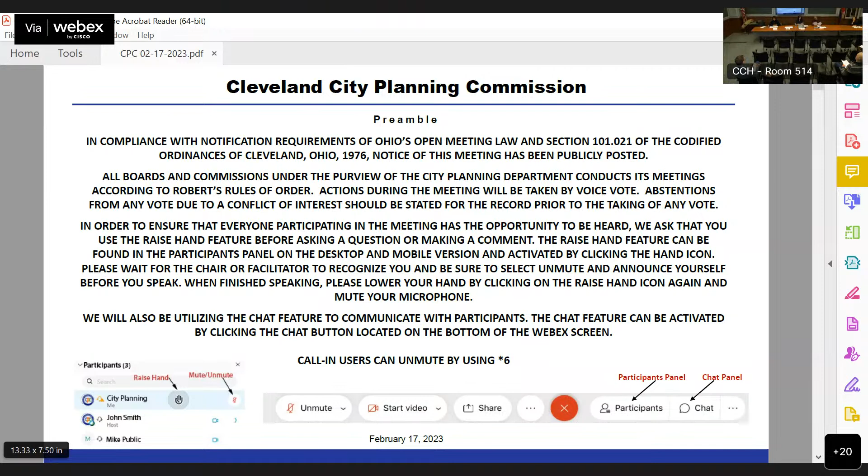The raise hand feature can be found in the participants panel on the desktop and mobile version and activated by clicking the hand icon. Please wait for the chair or facilitator to recognize you, and be sure to select unmute and announce yourself before you speak. When finished speaking, please lower your hand by clicking on the raise hand icon again and mute your microphone. We will also be utilizing the chat feature to communicate with participants. The chat feature can be activated by clicking the chat button located on the bottom of the WebEx screen. Call-in users can unmute by using star 6.

All meeting activity is being recorded via the WebEx platform. These proceedings are also being live streamed via YouTube. All requests to speak on a particular matter via our website and email have been considered. We've also received emails from those who have provided written comment on a particular matter.

Thank you. Michael, can you call the roll? Anthony, present. Downing, present. Fluker, present. Curry, present. McCray Scott, present. Shiori Clark, present. Madam Chair, we have a quorum. We have a quorum, thank you.

First order of business is to approve the minutes from the last meeting. We have a hard copy here that we've reviewed as well. I move to accept as presented. A second. We have a motion and a second. Any other items from the members online? If not, we can call the vote. Anthony, yes. Downing, yes. Fluker, yes. Curry, yes. McCray Scott, yes. Shiori Clark, yes.

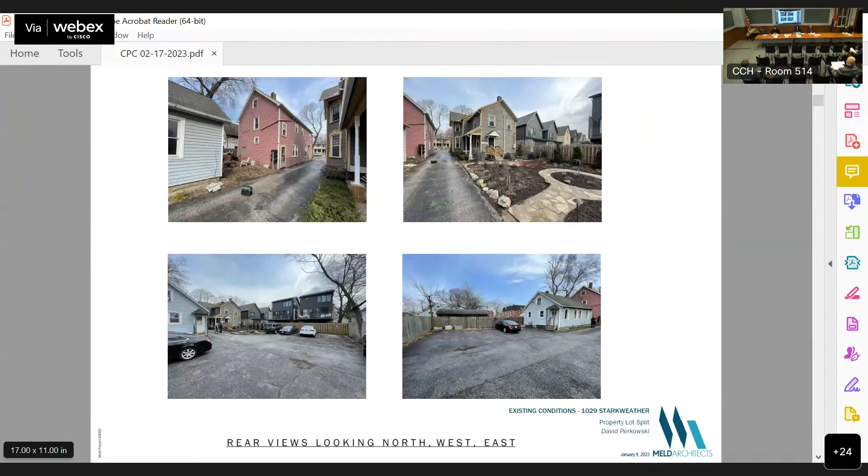Is there a plan here? Is there a plan for renovation or selling, or what's the intent of the split?

The property is owned by Merchant Area Living Partnership, and my name is Dave Perkowski, I'm the owner. The goal is to renovate the front house, and with that back cottage, there's a small existing structure. We want to make sure we could get the lot split, but then the ultimate goal is to design new construction, take down that structure and build new there. The ultimate goal is to sell both the front house and the back house, but to renovate both.

Commission members, any questions? I move for approval. Second. Motion and a second. For the commission members online, it will be helpful if you raise your hand on any item, either to comment or ask questions, so I can see there are questions online. But I don't see any, so let's call the roll.

Anthony, yes. Downing, yes. Fluker, yes. Curry, yes. McCray Scott, yes. Shiori Clark, yes.

Madam Chair, I have a question, I'll introduce myself. I'm Shane, I'm from the survey department, I facilitate a lot of these splits that go to planning and other issues with building. This will need to be looked over by planning and building, mainly for their issues like they'll want to see a utility easement, where you're hooking up your water and sewer. But the only question I have planning-wise right now is that access easement—is that an easement of record? Yes, it is a recorded easement, not the proposed easement, but the access easement is a recorded easement.

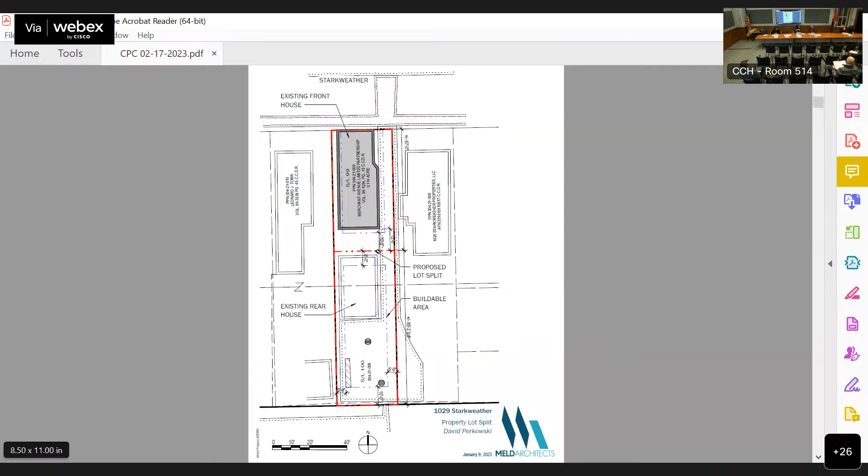Maybe we can take it off the line. For the most part of the commission, our hope was that you've removed that, that we're not reviewing them here. They were being reviewed between you and planning offline, not here at the commission, but thank you for your questions.

For the record, which is why the second one is postponed, when there is a lot that requires access, we require that it's recorded. That is a requirement we have. That also includes things like who's in charge of snow removal, those sorts of things, and that's been a practice we have had for many years. Sometimes we will approve something conditionally and the director will not sign off on it until it's actually recorded, so we make sure that happens because we know there'll be unhappy neighbors down the line eventually if we don't. So thank you. We had a motion, second, full vote.

This one has passed. On the next item, which is 004-13-0117, at 2504 West 10th.

I need a motion to table by someone. Madam Chair, I move to table the address 2504 West 10th Street lot split and consolidation. And I second. Motion and a second.

Let's call the roll. Anthony, yes. Downing, yes. Fluker, yes. Curry, yes. McCray Scott, yes. Shiori Clark, yes. Motion carries, thank you.

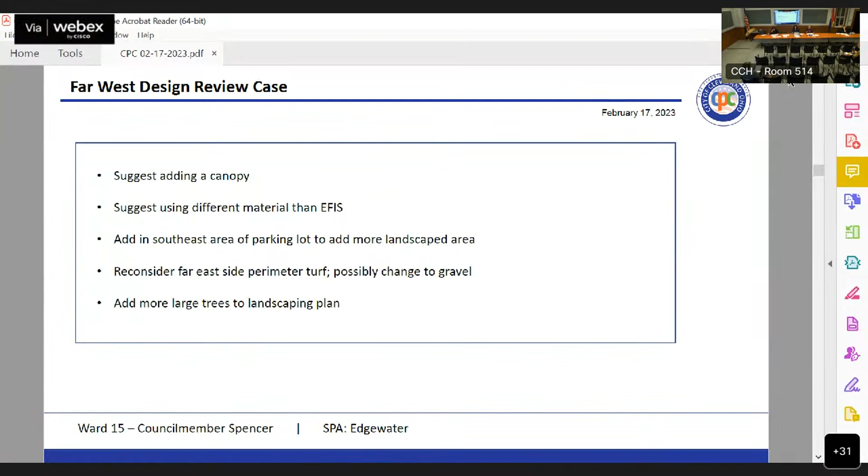Anthony, yes. Downing, yes. Fluker, yes. Curry, yes. McCray Scott, yes. Shiori Clark, yes. Motion carries.

All right, Dave, I need to swear you in first. Do you swear to tell the truth, the whole truth, and nothing but the truth, as you shall answer to the penalty of perjury? I do. Okay, all right, take it away.

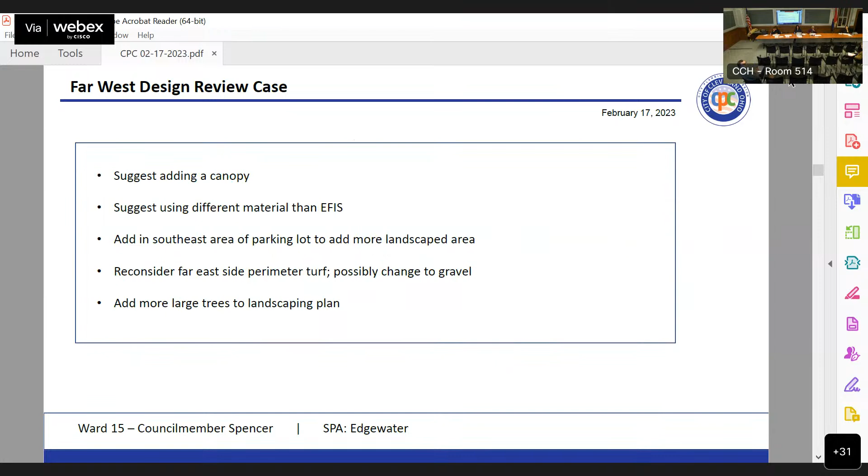Okay, so do I have control of the screen or would you like me to walk through here? Basically, we laid out per the request, identifying a district map here. We're looking at a site that's right on the edge of Cleveland and Lakewood, at the corner of 117th and Detroit.

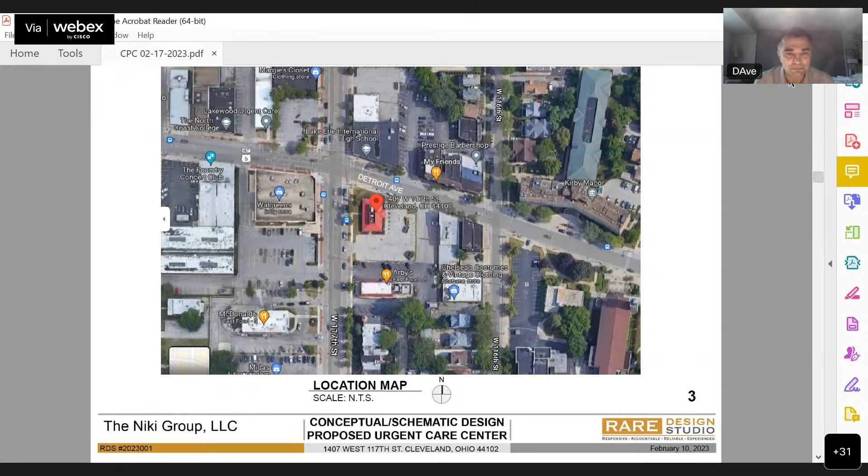This area here is currently zoned with the pedestrian overlay district at this particular corner. The site here currently has a Pizza Hut located on that corner, and that's what we'll be looking to demo. I totally understand it makes sense to have the demo wait until after we go through design review, but we're looking to remove the existing Pizza Hut and replace it with an urgent care center.

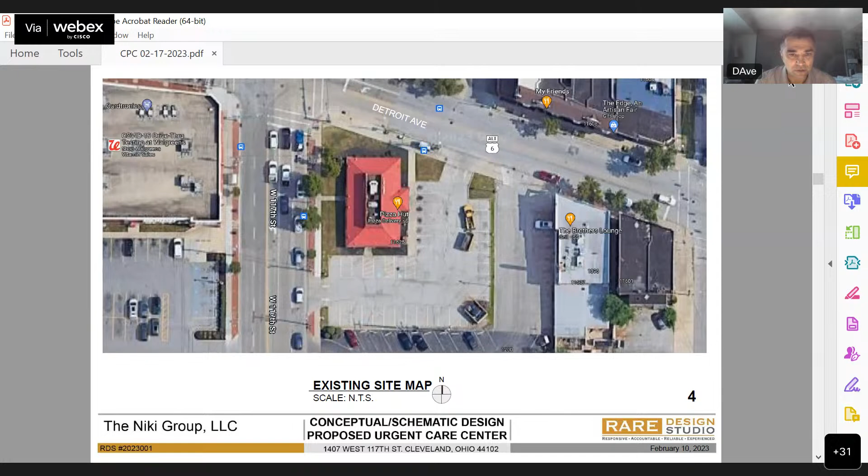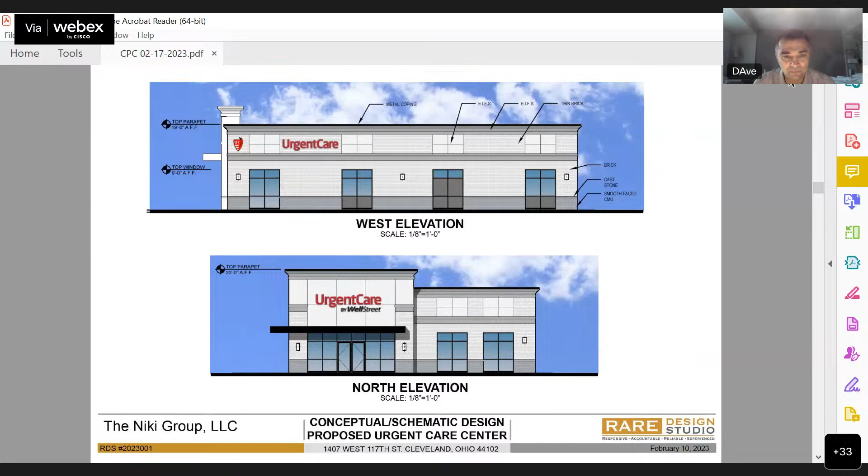I believe I do have Peggy Brown, our landscape architect, on the call as well. Maybe if she could unmute, she could walk you through the landscape design and discuss the items that were requested from design review that we incorporated.

Thank you. Do I need to be sworn in? Yes. Do you swear to tell the truth, the whole truth, and nothing but the truth as you shall answer to the penalty of perjury? Yes. Go ahead. All right.

Thank you. As Dave was saying, that Pizza Hut is coming down, and currently surrounding it is all turf with some shrubs and a bad looking tree in there. So we're getting rid of all the shrubs and all the turf, replacing the turf with a bed of ground covers, ornamental grasses, and some shrubs that will give some fall color, along with other shrubs that will give an evergreen aspect to the base of the building.

So we're eliminating all the turf altogether. It'll be drought tolerant, very low maintenance landscaping that we're proposing here.

Along Detroit Avenue, we're coming back in with a series of zelkovas that are going to be moved far enough away where they're not going to be impacted by the power lines there, but provide kind of canopy along the streetscape for enhanced pedestrian movement there, along with some additional trees.

On the south side of the building will be a columnar tree where we'll be pulling out some of that asphalt that currently exists in order to extend the building facade down farther to the south. It's going to create some of that massing that the building would provide, but instead of having an open gap with a lot of asphalt there, we're closing that gap down with two boxes of trees with some shrubs in there to provide a barrier from the parking lot.

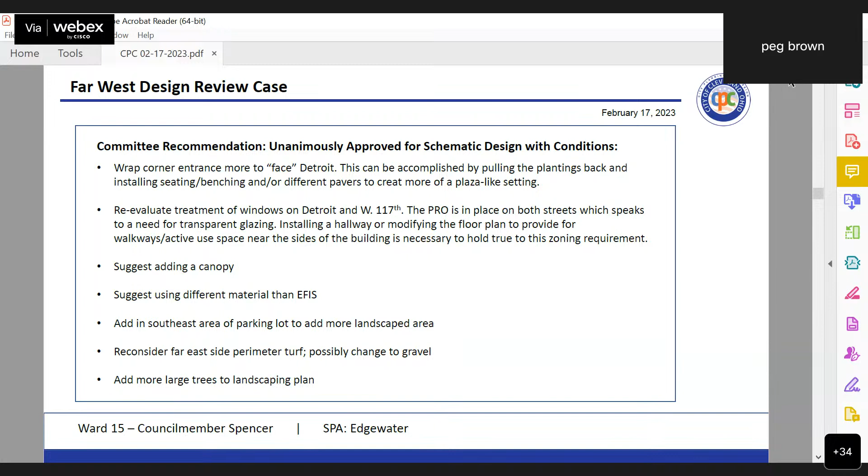And what about the first two - the wrap corner? On that one, if I may, we talked about it being kind of a security issue, not to put it out at the corner of our property calling in the public right there. So we provided that plaza, more open than what it originally was with just a 6-foot walk up to the buildings. We've expanded those areas at both doors to be more plaza-like and kept all the activity closer to the doors where it's more easily watched, and to keep eyes on it instead of it being out on the corner where it's going to be less visible from the building. And I think there's another mini park - it was suggested there's one across the street, kitty corner to this one in Lakewood.

And for item number 2, the original design review we showed had all the windows on 117th as opaque, all kind of spandrel glass. So that's where the discussion went - could we put a wall back further to create an alcove to put displays, since we were not having any transparent glass over there. So we went back to the tenant, reworked the design in order to shift as many spaces as we could to have more transparent glass over there. That's why, instead of going the hallway route, we found ways to get transparent glass where we originally did not have any on 117th.

To the chair, if I may, there are staff comments by Shannon Leonard and also by the planner Adam Davenport, so if we could have them address some of those - it's the PRO.

I can take a first crack at it. So the main discussion around this project is mostly because of the PROs on Detroit and West 117. The use with the urgent care and wanting the privacy of those rooms is kind of in conflict with the PRO glazing requirements. If maybe Xavier wants to flip back to the photos across the street - the CVS or other buildings on the corner also have those fake windows with advertisements in them. So our discussion and goal at the committee level is to create a little more active use inside right there at the corner.

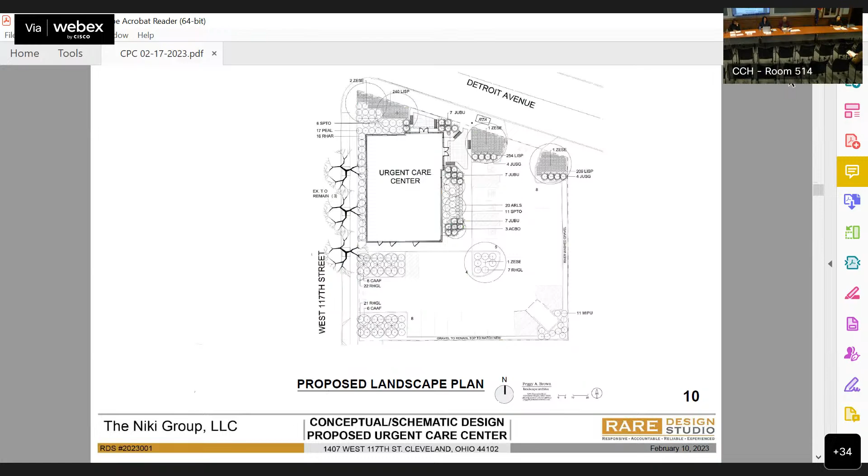I make a motion for schematic approval on FW 2023-002, West 117th Street urgent care construction, with the conditions as outlined by the Far West Design Review. Second. We have a motion and a second. Can you call the roll? Anthony, yes. Downing, yes. Fluker, yes. Curry, yes. McCray Scott, yes. Shiori Clark, yes. Motion carries.

We need a motion to remove from the table the demolition, and then a motion for demolition. This was 2023-003, the demolition of 1407 West 117th Street.

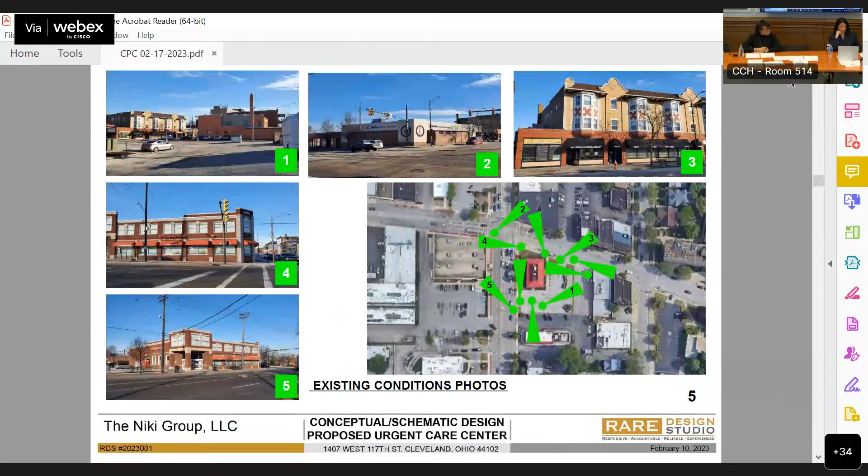I'll make a motion to remove from the table, 2023-003, proposed demolition of a one-story commercial building. Second. Sorry, is that the right one? No, it's 2023-003. Okay, that's fine. And we have a motion, do we have a second? Second. Motion and a second.

Call the roll. Anthony, yes. Downing, yes. Fluker, yes. Curry, yes. McCray Scott, yes. Shiori Clark, yes. It was removed from the table, so now we need to approve the demolition of the building lovingly known as the Pizza Hut.

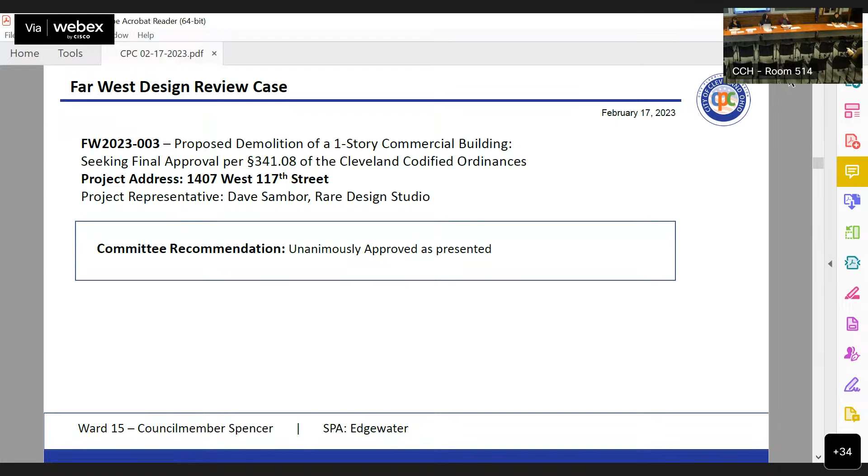We need a motion for demolition. I move to approve the demolition of 2023-03, a one-story commercial building. I second. Motion and a second, call the roll. Anthony, yes. Downing, yes. Fluker, yes. Curry, yes. Scott, yes. Shiori Clark, yes. Motion carries. All right, thank you, Dave.

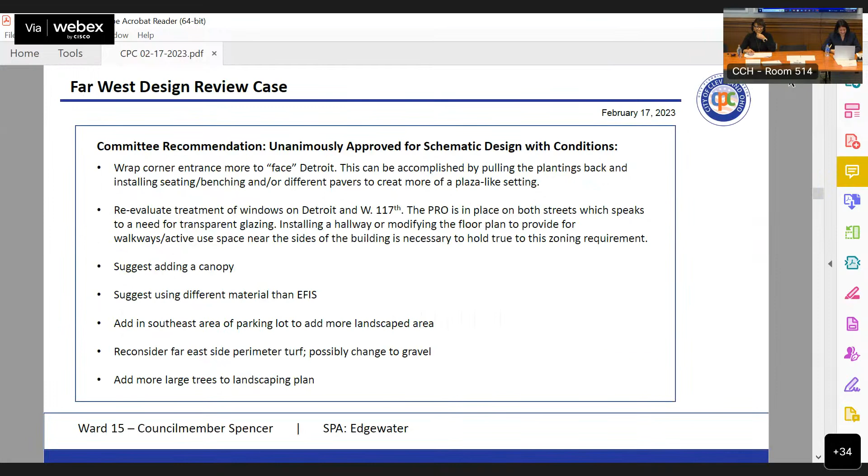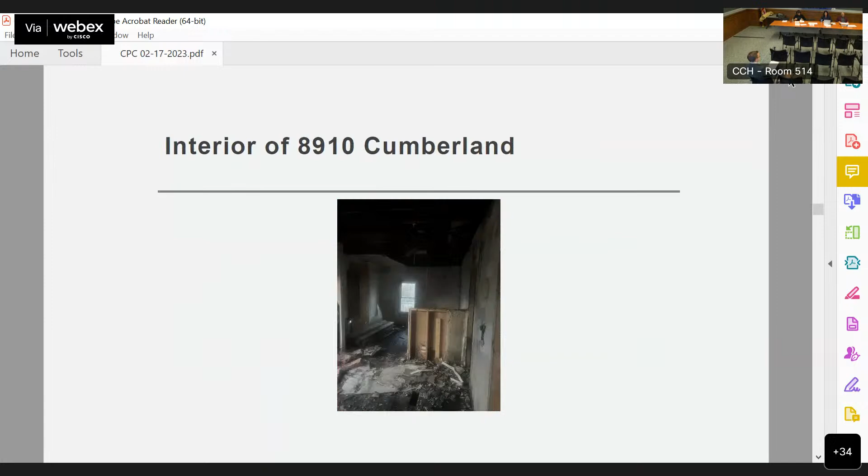Now we're going on to Northeast Design Review. This is 2023-032, the Hitchcock Center. It's new construction, this is also schematic design approval at 1227 Ansel Road.

Brian, are you- oh wait, it says the applicant withdrew the project. The planning commission tabled it, subsequently tabled. Are they here? Should we remove it from the table?

Good morning, this is Brian Garrity. Okay so Brian, first we're gonna remove it from the table, then I'm gonna swear you in, okay? So I need a motion for this one to remove it from the table.

I make a motion that NE 2023-032, the Hitchcock Center new construction, be removed from the table. Second. Motion and a second, call the roll. Anthony, yes. Downing, yes. Fluker, yes. Curry, yes. McCray Scott, yes. Shields, Erie, Clark, yes. Motion carries.

All right, now we're gonna hear the case, the same case once again. This is schematic approval for 1227 Ansel Road. Brian, I need to swear you in. Is there anyone else that's gonna speak to this besides you? I also have on the call with me Mark Dodds with the Finch Group, he'll probably speak as well. Okay, that's fine. Do you both swear to tell the truth, the whole truth, and nothing but the truth as you shall answer to the penalty of perjury? I do. Okay, take it away, this is schematic.

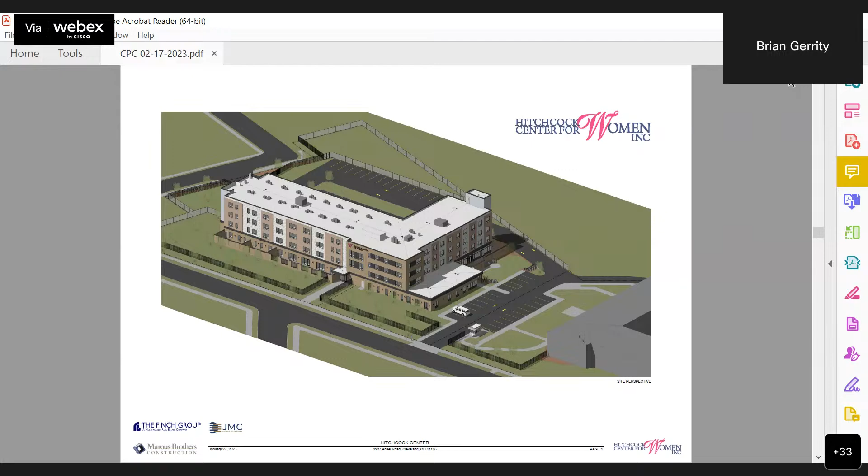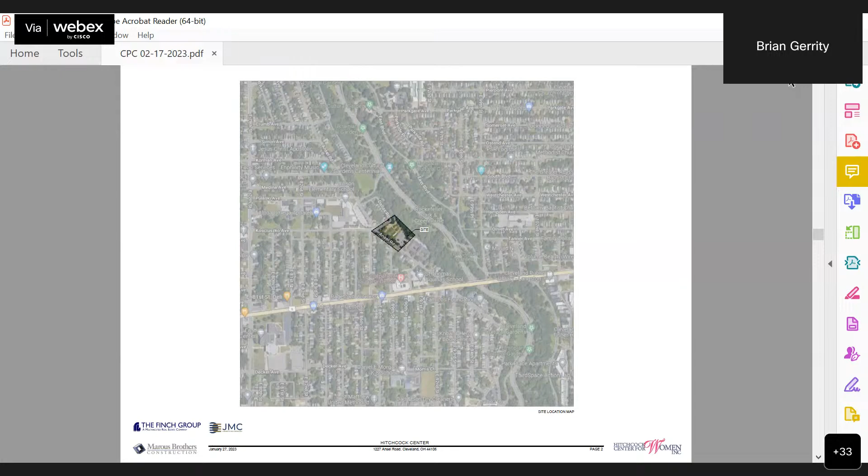This slide is just showing where we sit, right over the Cultural Gardens on Ansel Road by Superior Avenue. Just to let you know.

Site demolition: the existing site is mostly a combination of greenfield and some old asphalt paving. There are a couple of existing structures, a small greenhouse and an old handball court, both unoccupied. Both buildings are going to come down and the site's going to be completely clear.

So the site plan - early discussions with planning a little while back, we previously had the building pushed towards the back of the site. It was requested that we bring the front elevation of the building in alignment with the existing seminary building.

There are two primary components to this project. We call it residential treatment, which will serve the same function as what the Hitchcock Center is doing now - treatment for women with substance abuse issues, and they also allow their kids to live with them. That's one part of the building, the right wing that goes up and down. The wing on the left that runs left to right is a supportive housing component with 53 total units. We're providing 43 parking spaces for the supportive housing, and 22 parking spaces for the residential treatment on the right.

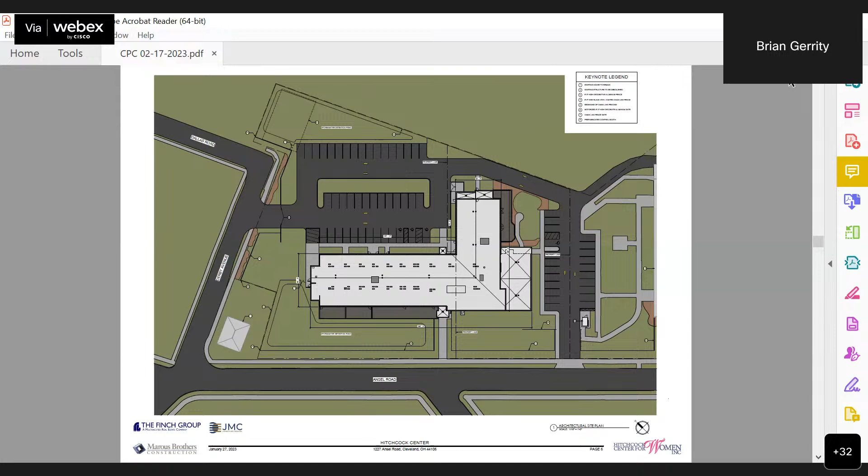Here's our landscape plan that we presented for schematic approval. You can see the rain gardens in the front and back of the property. Some trees will be lost along Ansel Road because the stormwater detention gets into the drip line and they're not salvageable. We'll save what we can, prune and clean them up, and add a substantial amount more trees within the property and along Ansel Road and Dallas Road.

We are introducing exterior courtyards. There will be a secure courtyard for the residential treatment side with playground structures, hopefully in the future, for the kids staying there with their mothers. There will also be courtyards for the supportive housing, both for the units on the first floor and courtyards serving common areas like the community center and fitness room.

So, you can keep going to the next slides.

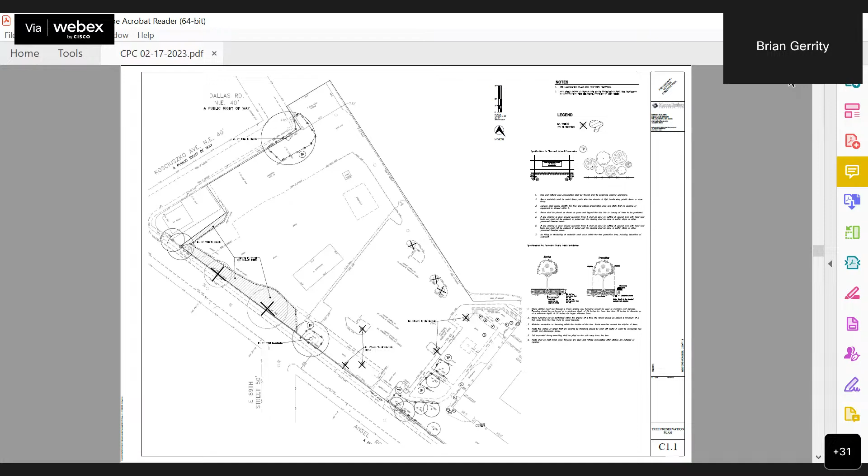This slide was just our tree preservation plan, which we were required to submit. The following slides, I don't know if they're of general interest, but it's our SWPPP plan for the project.

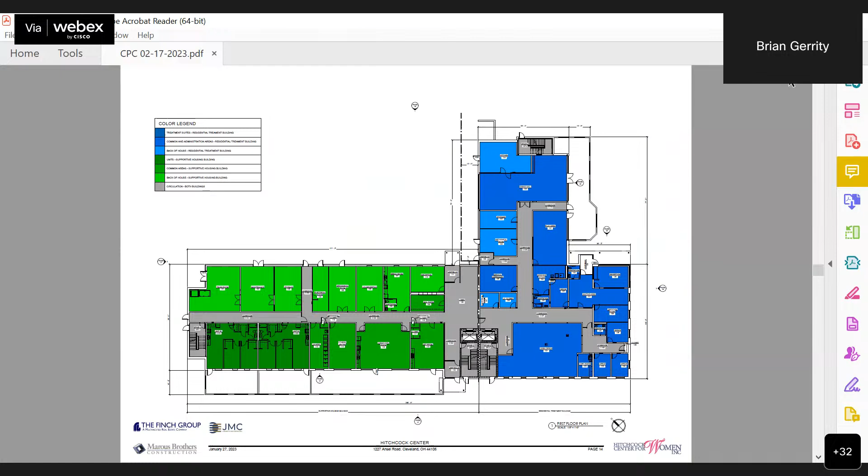The blue floor plan on the right is the residential treatment. The first floor has communal areas like a playroom for children, a communal dining hall, and administration areas. On the left-hand side, the supportive housing has common areas, a fitness room, communal laundry, community room, arts and crafts room, and a couple of two-bedroom units in back of house.

And the upper floors — this is Mark Dodds, the Finch Group. I'm going to let Brian take a break for a minute.

The reason this project is configured as two separate buildings joined together is that the residential treatment, the blue part of these plans, is being funded primarily through grants from Cuyahoga County, the City of Cleveland, and the Cleveland Clinic Foundation, with operations funded through Medicaid and Medicare. The green portion is being funded through bond gap financing from the Ohio Housing Finance Agency and 4% low-income housing tax credits, as well as other funding from the city and county. Its operations are funded by project-based Section 8.

We have 53 units assigned to this building. What that means is the green portion is being treated as supportive housing. That's a new program for Hitchcock.

Because it's funded with project-based Section 8, we cannot discriminate. So there is a probability that men will be staying in the supportive housing, whereas the treatment side is strictly for women and their children up to the age of 12.

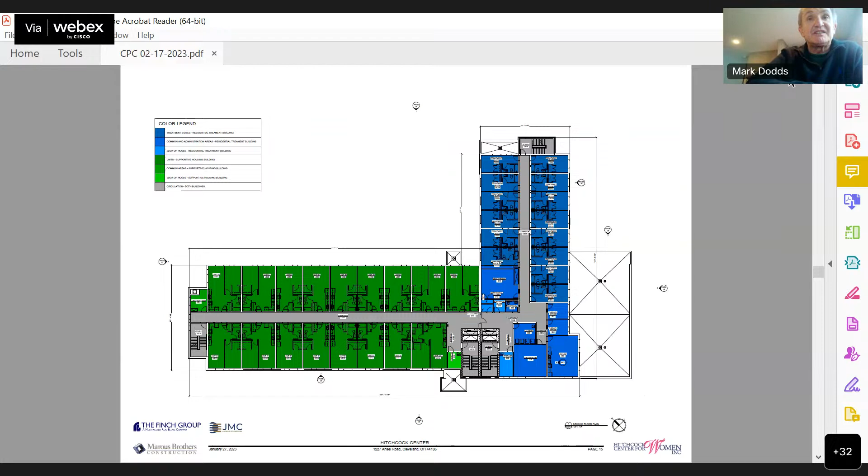So basically, the reason for two buildings is that they're funded separately, both in terms of capital for construction and operationally. But they will look like a single building, as you will see.

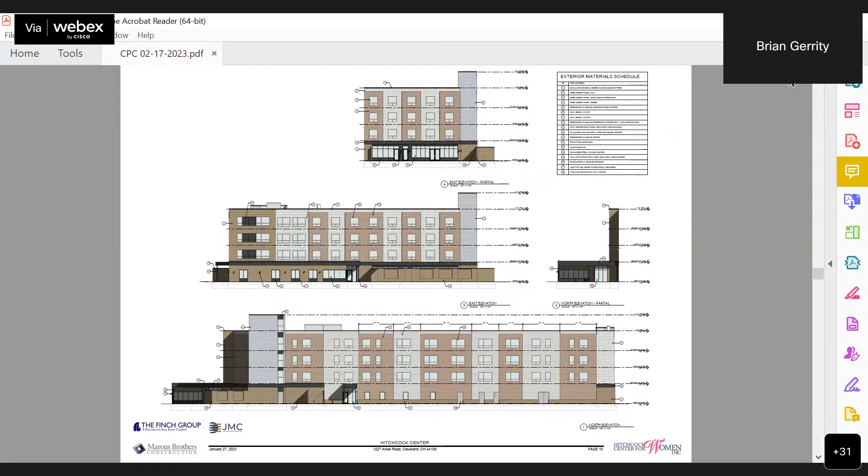Okay, thanks for that, Mark. I think that's helpful. Probably to talk about the exterior elevations, it's helpful to go to the last slide that has our 3D perspectives.

The perspective at the bottom is the public-facing elevation you'll see on Ansel Road. The elevation at the top is the rear of the building, backing up towards the cultural gardens.

When we first came to Northeast Design Review, one of the comments we got was that the overall aesthetic looked a little too institutional. I think a lot of what was driving that was the way the elevations were designed and arranged — we had a lot of very strong horizontal banding. So we took that into account and got rid of the horizontal banding outside of the main brick, prominent corner feature, and broke up the elevations vertically so it started to read more as housing, like units stacking on top of each other.

Materials we're proposing include primarily face brick on the first floor, with some aluminum storefront punched openings, and brick as well. On that corner piece, the color tone will be similar to the adjacent historic seminary building that Hitchcock currently occupies — sort of an acknowledgement to that.

The other primary materials are fiber cement Nichiha-type panels. The white is sort of a flat monolithic panel, and the brown panels are a wood grain finish, reflecting some of the wood siding of the single family homes scattered around the neighborhood.

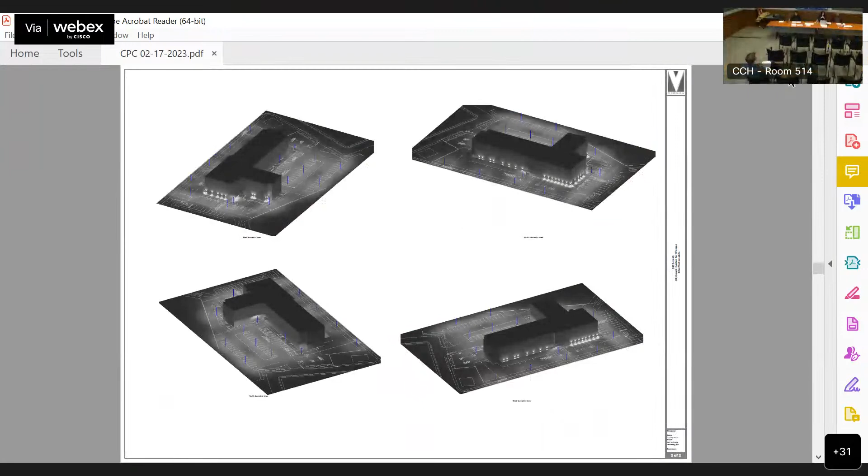Okay, I have a question back to Mark about what you described — if you can go back to the site plan. You said there are two funding sources, for the first floor plan, the one that's blue and green. One is the blue and the green, and the other is Section 8.

Is that correct? And the other one is market rate? Is it?

No, the residential treatment capital dollars are coming from grants from the city, the county, and the Cleveland Clinic Foundation. So that will be built debt-free for the Hitchcock Center, and then their operations are covered the way they are now.

They get reimbursed from Medicaid and they get some funding from the ADAMHS Board. Got it. And there's one of the - I guess what I'm asking is, is there one front door to this building?

The front door for the residential treatment is in that sort of knuckle on the right-hand side. You can see where the courtyard is on the exterior. So there's an entrance for the residential treatment. That part of the project has to be kept very secure. Many of the women coming here are coming out of very difficult situations.

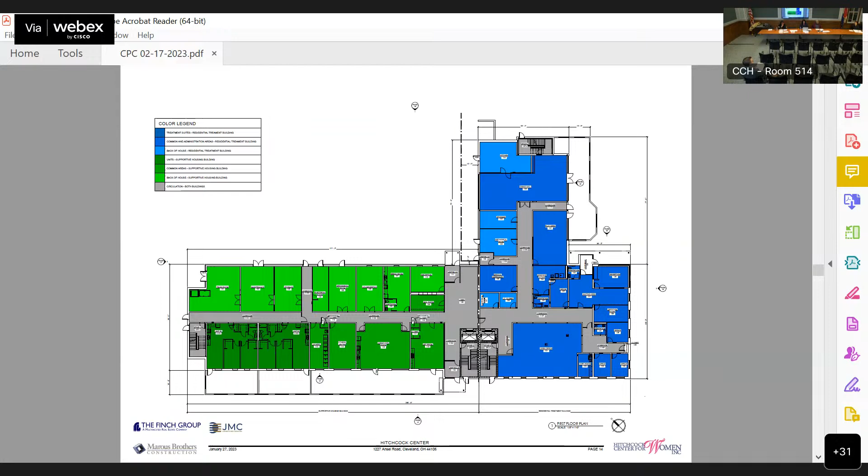Overall, we would say the design review committee's suggestions and recommendations should be considered, as well as your recommendation to have a circulation plan for the final review.

I think Marika's trying to say something, unless we're done. I think Shannon has her hand raised. Is that old, Shannon, with your hand raised? Marika does. Marika, go ahead.

Sorry, yeah, I just wanted to add, I agree with what August is saying around circulation and trying to understand how people will be able to flow in and out of this space. I think the other thing, just more of a suggestion, is that this feels like a large site with a lot of grass plantings, but as far as I can tell, almost no outdoor space that the women using this facility would be able to use. I'm curious if you had any plans for outdoor, probably shaded or private outdoor spaces. It just feels like there's so much room, yet somehow the building still feels exposed.

Well, maybe the first floor or the landscape plan might be best to pull up. Because we do have a dedicated outdoor courtyard adjacent to the playroom and the cafeteria, dining hall. And then immediately outside of that, we do have a dedicated area that is eventually going to be used for playground equipment for any of the children staying there with mom.

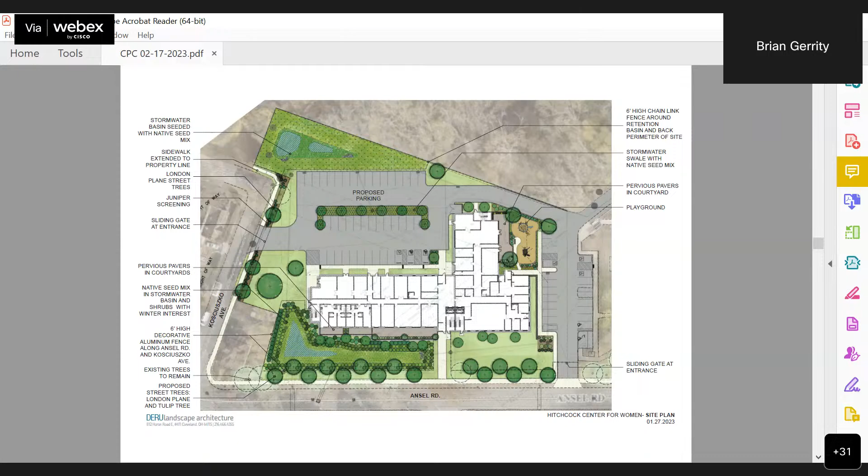I think that's great. I'm looking at the site plan and it feels like there's a lot of green space that is just going to feel like ornamental grass that isn't actually space anybody would want to hang out in. So that's a broad piece of feedback I have: is there a way to take some of that large amount of landscaped space along Ansel Road and/or that stormwater basin back there and actually make it into more of a seating area that could be designed as peaceful outdoor space people could hang out in during the summer, while still feeling private from the street. That may go against some of the other conditions around connections to the other facility, but if I was a woman living there, I would want to have a space where I could hang out outside when it's nice outside.

We could add that as a consideration, but I think you can think about it. I think you're saying, Marika, this is a suggestion to think about.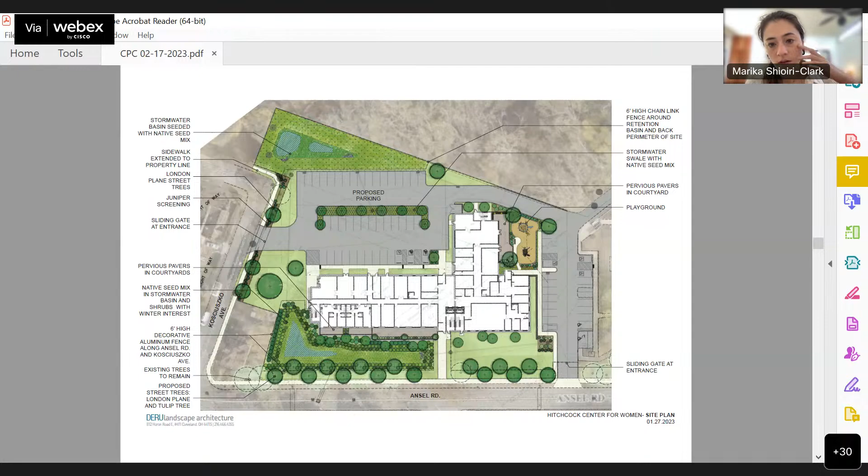Yeah, so I don't see any other comments. I think we'll need a motion. I think we should add August's comment to whoever makes the motion for incorporating the design review comments. Sure, I'll try. I move to approve schematic design of item NE 2023-32 with the 4 comments from design review, and the stipulation that the applicant come back with how this site's being used with circulation and considerations to other outdoor activity that might be more amenable to folks who are transitioning out of the treatment center.

Okay, we have a motion. Do we have a second? A second. Call the roll. Anthony, yes. Downing, yes. Booker, yes. Curry, yes. Craig Scott, yes. Shioiri-Clark, yes. Motion carries. Thank you very much.

We'll see you soon at final approval.

The last design review item is Euclid Corridor 2023-005. This is the Cleveland Clinic Innovation District Research Buildings. This is for schematic approval. I see Dallas Felder and Jayme Schwartzberg.

Anyone else? I will need to swear you in. Is there anyone else, Dallas, on your team besides the two of you? I believe there are representatives from the Cleveland Clinic. Yeah, Travis Tyson from Cleveland Clinic. Okay, please, Travis. So all of you, do you swear to tell the truth, the whole truth, and nothing but the truth, as you shall answer to the penalty of perjury?

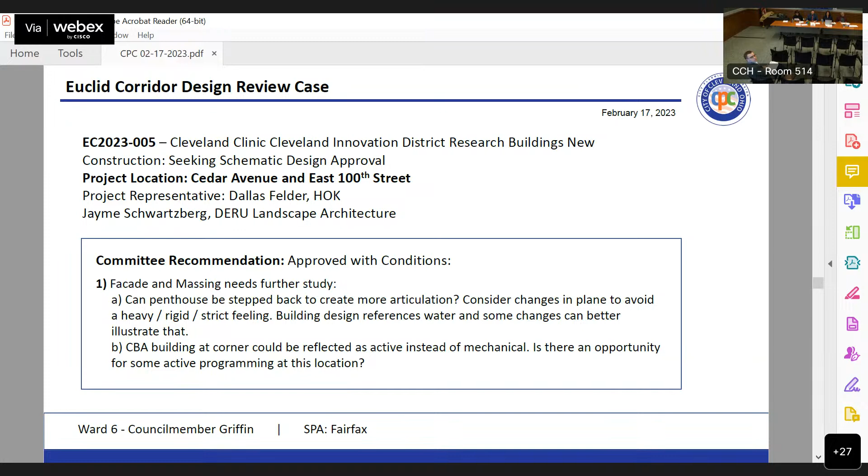Good morning, everybody. I'm Travis Tyson, Director of Planning for the Cleveland Clinic Enterprise. Thank you for the opportunity to come again and present our Cleveland Innovation District project. This project is a new global center for pathogen and human health research, and it'll be a cornerstone for the Cleveland Innovation District along Cedar Avenue.

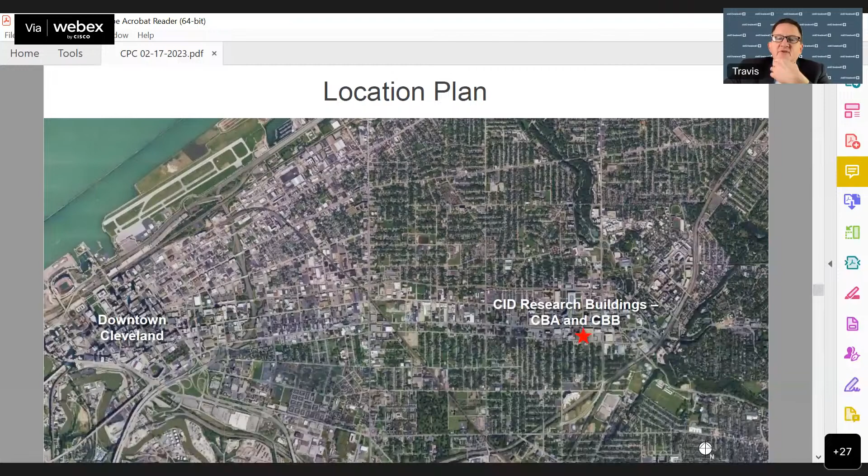As you know, it's part of the Jobs Ohio initiative. This project itself will bring about an estimated 1,000 jobs to the city by 2029. We've been working closely with FRDC and the Fairfax community, as well as their master planning architect, UDA, as we develop this project and they develop their master plan. We're excited to see this project come together and what it's going to do for not only the clinic, but the community and the city of Cleveland, and most importantly, the healthcare research and outcome around the world.

We are here today seeking schematic design approval by the committee. As you know, we received unanimous approval from the Euclid Corridor Design Review Committee yesterday. As we continue to develop this final design of the project, we will take into consideration the Design Review Committee's recommendations and continue to work with the community partners and get their feedback as the design progresses. So we are excited to bring the project to the city here today for approval as part of the Cleveland Innovation District, and we appreciate your time today.

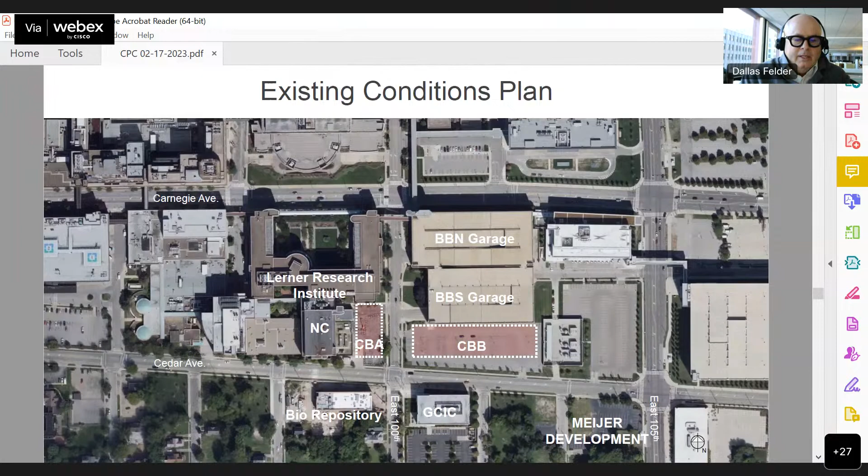People using this building will be coming from the east parking garage at 105th. We looked at this as a real opportunity to create a welcoming entry into the campus, intentionally setting back the buildings, aligning with the existing campus buildings, but also to create green space or park space, or pocket park space, at the front of the buildings to engage the neighborhood in a more gentle manner. And Jayme will talk about that next.

So what you're looking at is the overall landscape plan for buildings A and B. We've tried to look at both the pedestrian movement outside of the buildings, how people are walking by, where they're going to want to cut corners, how employees from the clinic are going to go when they're walking to the Meijer to get lunch, where people from the neighborhood are going as they're cutting through into the clinic, and also really trying to bring some pedestrian traffic up to the building itself.

HOK has designed a really thoughtful building that, despite the level of security required for research, is really attempting to bring some of this activity, make it very visible to the neighborhood, and really engage people with the incredible work that's going to be going on here.

The clinic has also been very thoughtful about the employees in the building, that they're going to be looking for places to come outside, to have a coffee, to get lunch, to take a little break, take a phone call. So we've placed seating close to the lobby so that it forms an extension of the lobby. You can come outside and sit, but also take a quick break or a little bit longer break, and enjoy the landscape. Then you'll see some benches closer down to the corner, adjacent to the existing bus stop.

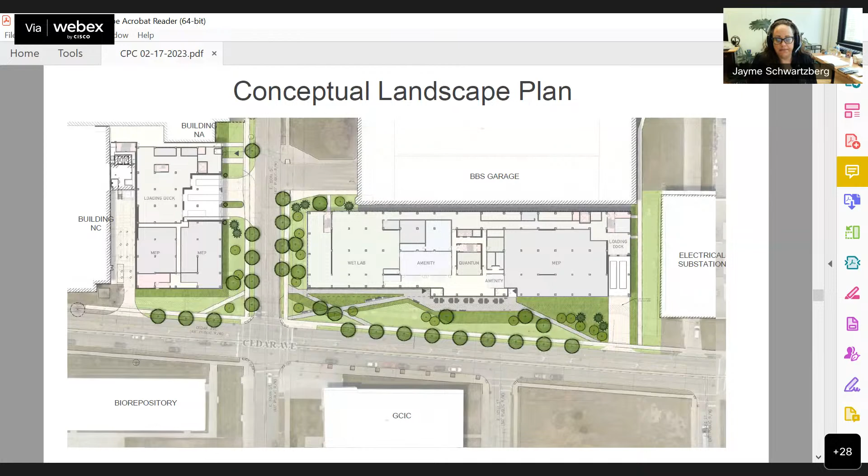You can go to the next slide. So this is a closer view of Building A. Building A is much more of the kind of mechanical equipment, loading dock sort of uses for the research.

You can see we have a large loading dock that faces onto 100th, and we've really been trying to work with the clinic. They've been great about what that pedestrian experience is like and how we keep it as softened as possible, so we're still working through that. And then you can see the landscape, the street trees starting to create that gateway between the two buildings.

You can go to the next slide for Building B. Here you have a closer view of where people are being brought up to the main lobby. You can see the quantum computing. There's wet labs on the west corner, and that's going to have co-working on the inside, so we really want people to see the inside-outside access going on there.

You can also see where the two black arrows are on the south side of the building—those are the main entrances. So coming and going at the beginning and end of the day, we've really tried to activate the front of this building and make it clear that it's the front by bringing employees through this way.

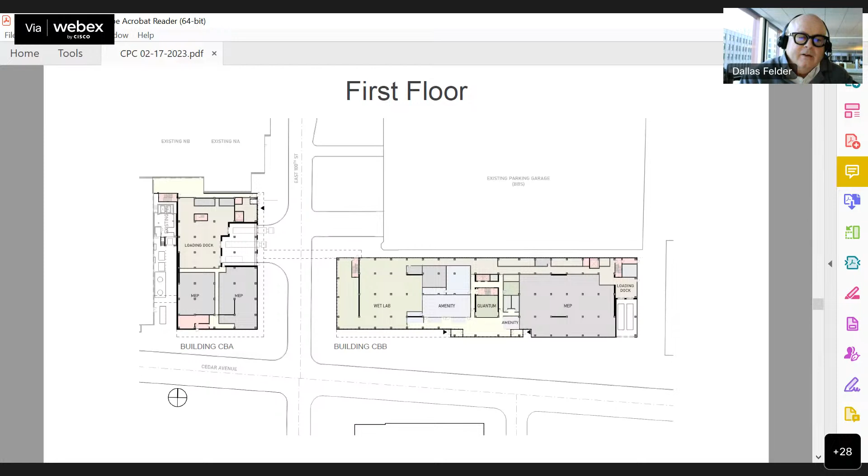And then on the upper floors, if you go to the next slide—the typical upper floors are research labs and offices, and again wet labs are basically filling these flexible floor plates so they're reconfigurable. The idea is that on the east, west, and south elevations in CBB are all glass, allowing for transparency into the building, allowing for actually seeing the people working and what's happening within. We're maintaining a simple mass right now—we're in schematic design and exploring how that mass is articulated.

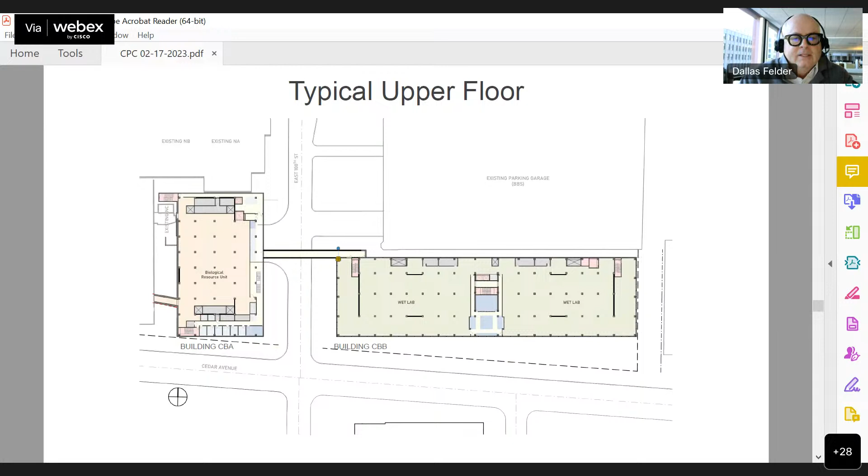Understanding how the section works, the buildings are mechanically intensive because of the research and air exchange, so we have larger mechanical spaces than in a normal building. And then we have a connecting bridge, the CBB bridge, which connects CBA and CBB. A lot of the proprietary research happening in CBA and CBB needs to stay within the building, so for researchers working in each building, the ability to move without going to street level is very important.

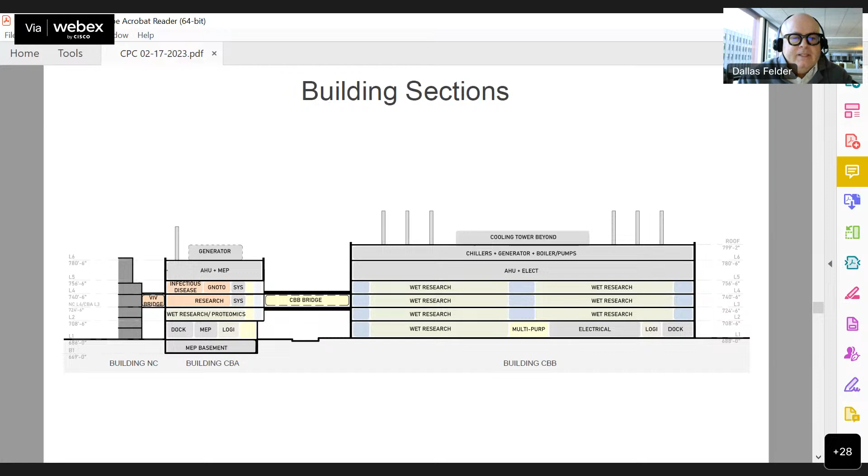Right now we're working on studies of how to get these things to work better together, and looking at how we push the mechanical back so it really reads more like a four-story building at the street line, while the upper floors start to recede a little. So those are the massing studies we're currently working on.

Just a scalar relationship to the existing buildings, this NC building to the left. These buildings are in a similar height relationship to building NC, which are the buildings already on Cedar Avenue. Looking at the massing and its articulation, the ground plane cuts back or cuts in, creating shadow and protective space, helping release the mass from the ground plane.

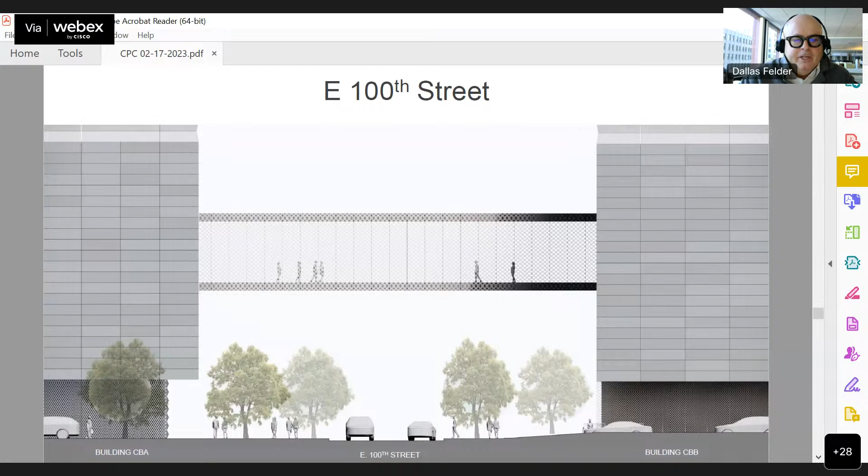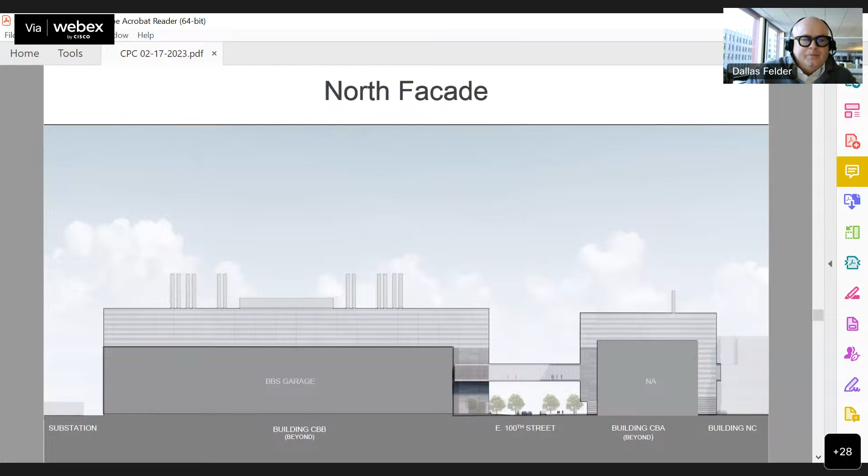Just a sectional relationship again, showing the CBA building on Cedar Avenue and the existing building NA, and the scalar relationships between the two.

Again, just showing the distance, the setback distance and the elevation. The ground floors are taller than normal so we can create a more transparent feel at that level. And the relationship to Cedar Avenue, that setback creates a bit more of a boulevard-type space, creating a street edge but with a green band.

Again, just the west facade of the CB building. What you're seeing is the edge as you're coming along 100th Street. Again, the idea of the materiality turning the corner and wrapping around.

Again, the sectional relationship between Cedar Avenue and CBB, and GCCI across the street. We're not creating an intense canyon, but trying to create a more open space between the buildings by setting CBB back.

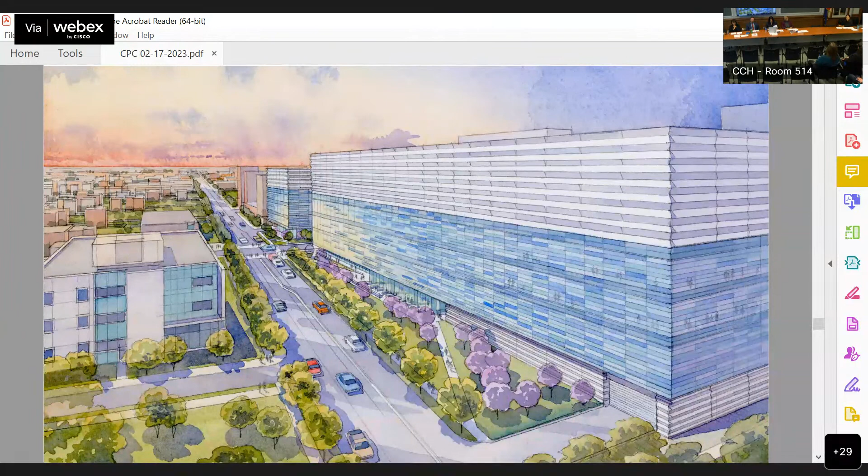Regarding what Commission Member Sherry Clark shared about how we could step down towards the street more, and if we're going to be inviting 1,000 more jobs through Jobs Ohio, and this is such a critically important building, I think we can do better for the Fairfax neighborhood here and that connection and the radical welcome. So I wanted to put that statement out there that we really need to be thinking about Cedar and how this acts as that zipper to the neighborhood.

I'd like to make one more point. It's more personal, but I think it's relevant for the research community, not just the clinic. I'm talking about Case and UH and whoever plays in that ecosystem. I have a son who's 20 years old, who's in chemical engineering, and he's trying to find internships.

He's looking everywhere else but here, which means we're not opening our hands and embracing that community of young, smart thought leaders, the next generation of thought leaders. And so we need to really start thinking about that. These types of solutions aren't getting us any closer. So I just wanted to share that, Madam Chair.

Okay, thank you. If there are any other comments, this is schematic design approval.

There were some committee recommendations also from the Euclid corridor that are listed here. I think it would be nice to make a motion with these, plus the further items that I think we all put forward. There's probably not an easy way to articulate that. If I could try, but you may want to, for the motion, or someone else, because I think it's early enough in the process for you to do some further considerations of what we're describing, especially around Cedar and the ground plane, and potentially even the building making a nod and a step down as well.

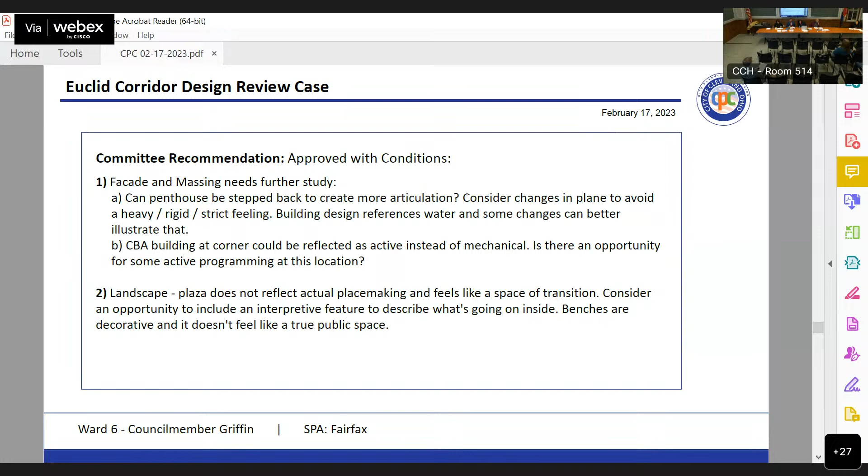Our last design item, thank you before you do administrative approval. Good luck. And so if you don't mind, can we just do the administrative approvals, in case, from a quorum point of view, it will take 2 seconds. If you can take a second to look, there are 6 items on the administrative agenda. There won't be any presentations. I do think the director has one comment about one of them.

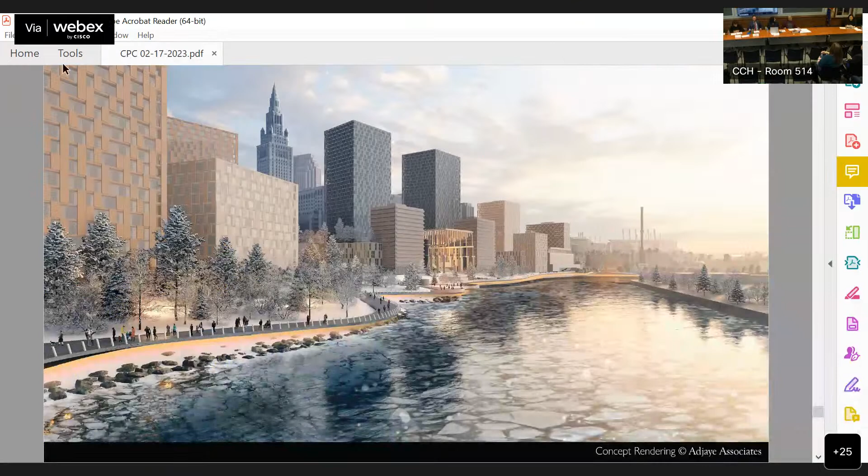Sure, so as we move towards our administrative approval slides, sorry that we're basically going through the background. They can scroll, they don't have to flip through it. Thank you to the chair. One of the administrative approvals I did want to raise is that...

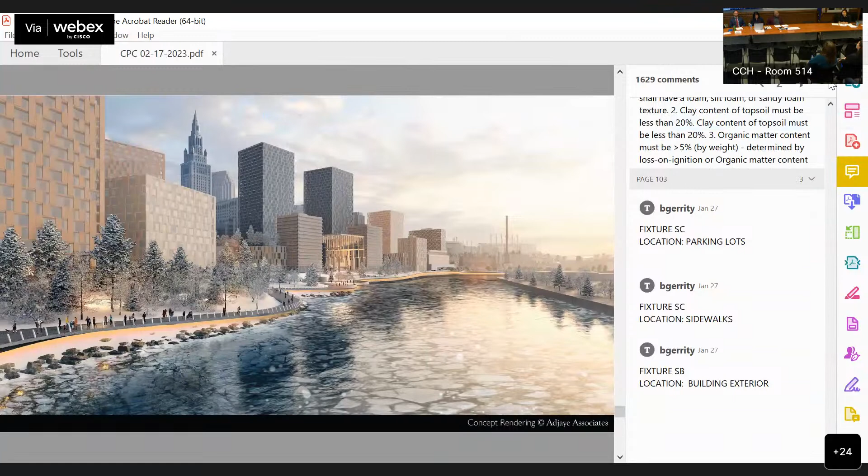In conjunction with the Mayor's Office of Capital Projects Planning, MOCAP has applied and is competing for the federal IIJA Reconnecting Communities Grant Program. That program specifically is meant to look at how highways have divided communities. The geography we've identified is East 22nd Street, where downtown connects with Central, all the way north along I-90, going towards MLK, then north towards the lake and across the lake to St. Clair Superior. The chair wanted me to mention it because this is a really important planning opportunity. We applied for a $2 million planning grant, and we've identified the local match within our budget, should we win and compete. We're really excited because, as we know, highways specifically through the urban renewal process destroyed and cut up neighborhoods, separated neighborhoods, and we really feel this is an opportunity to reconnect communities to one another and communities to the lakefront. We are working in partnership with ODOT, who is supportive of the effort moving forward.

So that's item number 6, right? That's item number 6 for administrative approvals. And item number 5 is the... what is that parcel? Did we see that? University? That was the riverfront parcel. Tremont.

Okay, we just need a motion for administrative approvals, if someone would. So moved. Do we have a second? Second. I'll call the roll. Anthony, yes. Downing, yes. Fluker, yes. Curry, yes. McCray Scott, yes. Sheila Clark, yes. Slife, yes.

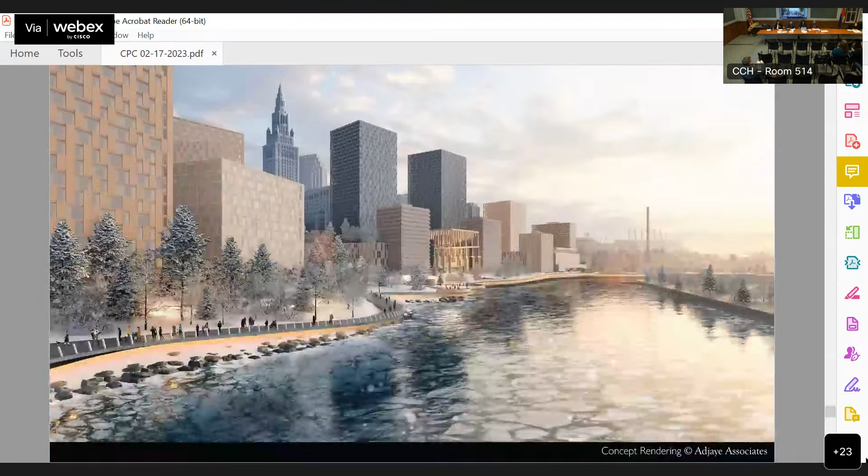Are you ready? Do you swear to tell the truth, the whole truth, and nothing but the truth, as you shall answer to the penalty of perjury? Yes, I do. Not you. Oh, don't have to. And how should I act? Because you're already sworn in. You're consistently sworn in for your whole life.

Question though, after the director goes, would you like to speak first? Would you like to wait? You have the honor. I'm happy to speak first. Okay, alright, director, you want to? Sure, give us the...

Thank you. We are really excited. Thank you, Bedrock team, for coming here today with your full bench. We are about to see a vision for a development plan that is likely the largest development plan that we've seen in the city of Cleveland for maybe ever, but in a very long time.

And part of the process that's really important to us, our position at the city, is that this is a meaningful, transformative project that will forever change the riverfront. It'll change our impression of downtown and Tower City, and it'll change the impression of the city and the region. So our position and our posture is really like, let's get to yes.

With that being said, part of the process that's important to us is for the commission to be able to see the vision as a whole, and then also to begin the discussion publicly about the city's goals, Bedrock's goals, and other public entity goals.

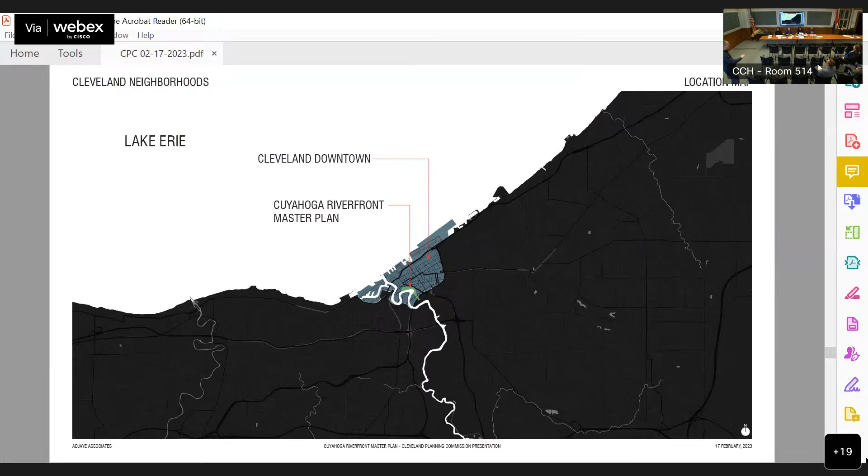In the mid-20th century, we got to a point of maybe overuse, not really thinking about how land is used, or how waterways can be used for the public good. From that point to today, the vision that you all have is changing, and we use this as a visioning slide for ourselves, reminding us that if we've made it this far, we're going to keep pushing forward.

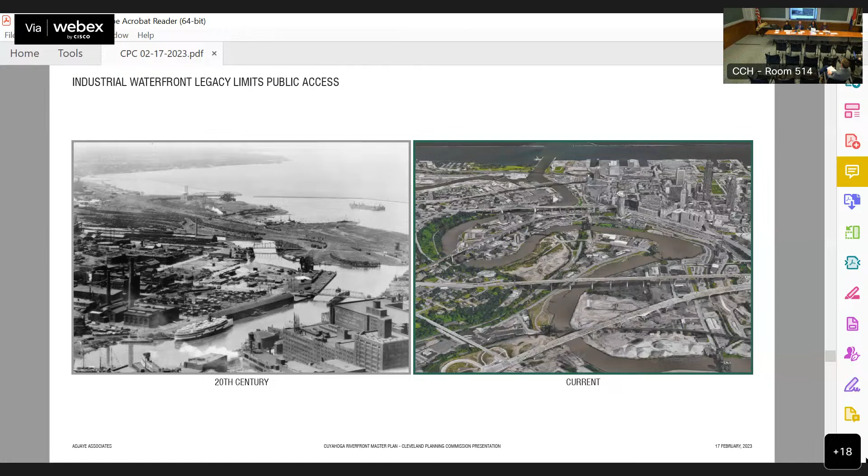This is from the 1940s, I believe. We used this image as well, talking about the infrastructure and why this site has maybe had difficulty being developed. You can see, like many sites on the water, we have that industrial waterfront, with easy access for boats moving in and out of the area, and easy access to the train lines just on the other side of Canal Road.

This is an illustrative section of the current situation. You can see the federal shipping channel on the far right, the bulkhead, and the surface parking lots down below.

The surface parking lots down at level 7, then we move up to more surface parking at level 50. Then the bridge - basically Huron Road as a bridge - as the Tower City development occurred over time. It was basically parking decks, with Huron Road connecting between Ontario and Superior, and then the RTA that slips under all of this. So this is kind of a cover for a large infrastructure that's telling a story of what's to come.

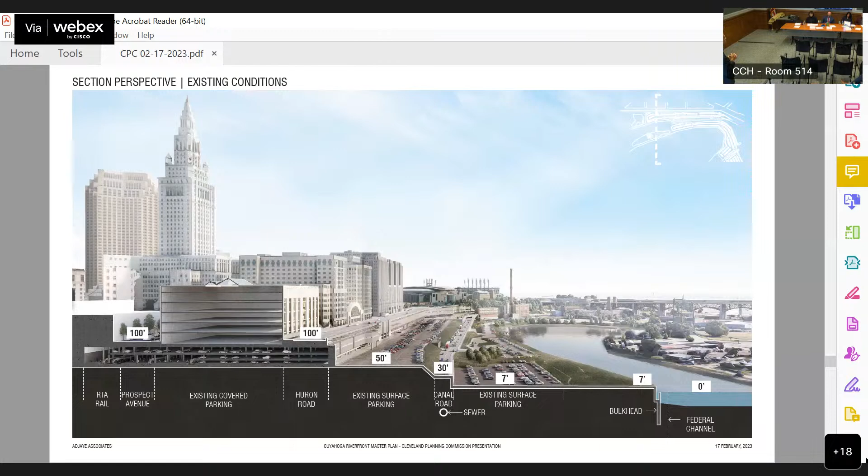As we started this, again these questions - I'm sure you've all read or maybe participated in design around 18-hour, 15-minute cities. What was really telling for us was to take that lens where we had the map, the scope of our jurisdiction, and actually back out of that further to really think about what the assets of Cleveland are, and what makes a place you want to live and work. The idea of having mobility and access for all, but really focused on being there versus just getting there - that's been a key and prominent tag in what we've been dealing with public consultants.

It's really about what it means to get there and be there, working with different means of multimodal transportation, and really trying to create those spaces. It's more about spaces than per se the buildings.

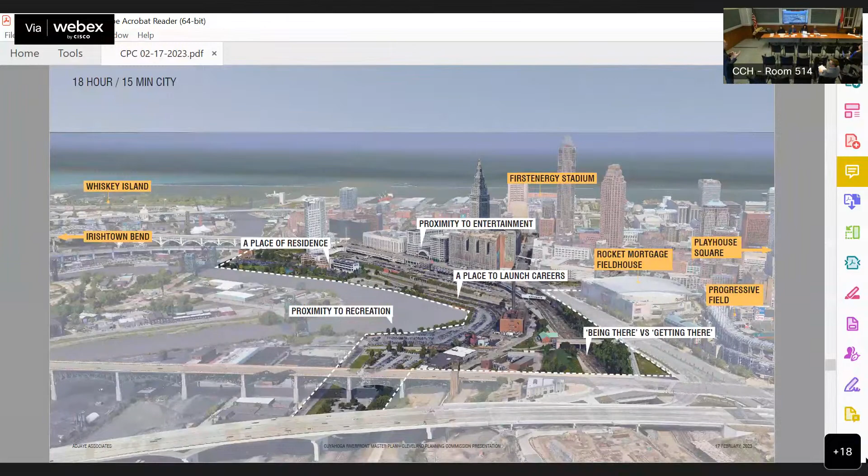Pulling out of the pandemic and out of what we've researched, understanding where urban design has been and where it's going, we really understood that national park management and natural resources were key during the pandemic, when everyone was trying to find where to go for peace amid stress. We started to see that thrive, and it goes without saying, I think we all appreciate more parks, and then entertainment venues.

Whether it was COVID or not, I think we all know the idea of social interaction, what it means to be around others, and then the idea of recreation and existing homes. Those are all things we see on the broad lens and understand really well. But it's really what happens behind the scenes that will make this successful. And that's developing these keys such as public transportation, truck deliveries, access, mitigating the site topography of 100 feet, and then reestablishing that urban bulkhead to make that civic space.

So we start here, pushing off the vision for the valley, and really thinking about the idea of master plans, city designs, and starting to focus more on the idea of natural resources, more so than existing in multiple components. So we've been working on the right balance between open space, developable space, and how...

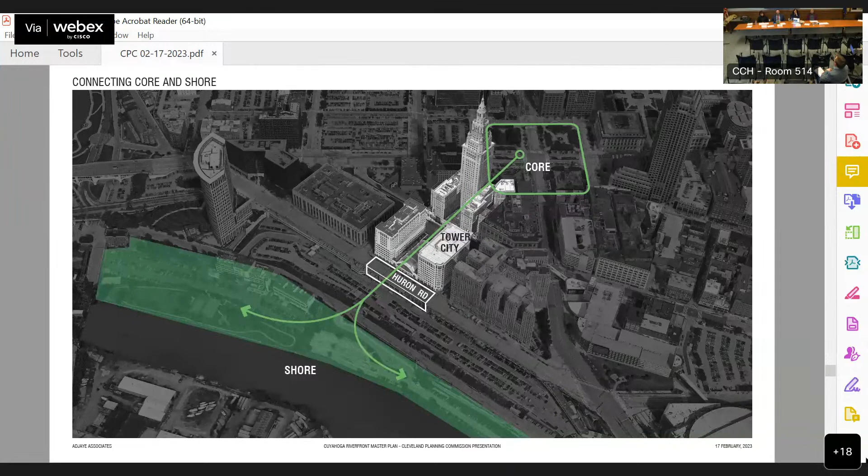So we start to think about that spine that's going here, basically thinking about the arcades of Cleveland and how that can manifest itself more into some of the history here of moving from Terminal Tower, Tower City, down to the shore. But we've highlighted that moment of Huron Road, which at present serves as kind of a dam, if you will. It's that diving board off to the section. It's the 50-foot drop, and it's a highway.

It has some heavy commercial traffic, speed limits rather fast. So we've identified that as something we want to dive into as a nucleus for how we'll unlock potential for the rest of the development. We've identified that also as maybe the move that Huron no longer becomes a castle wall or a border wall. We've started to look about how we make that transition back into the city with some development.

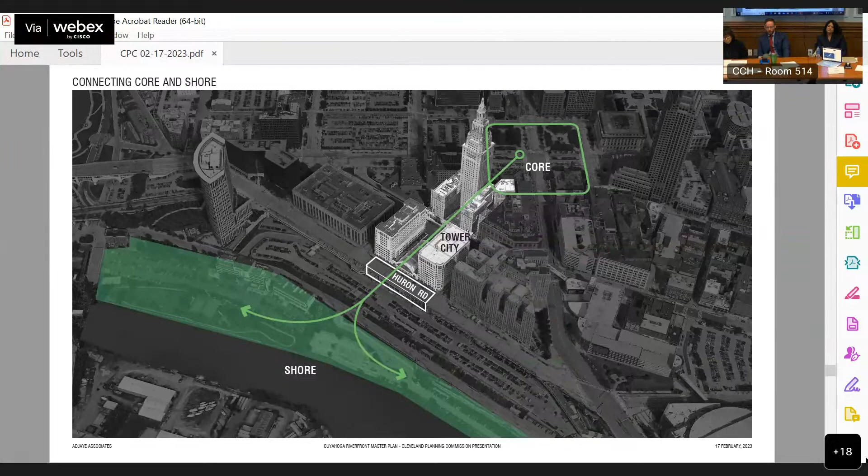So using some of those approaches and thinking about the transition, you can see we start with the public square down to what we call the porch, using Tower City as the gateway. So we create this spinal axis, which then goes east and west for development.

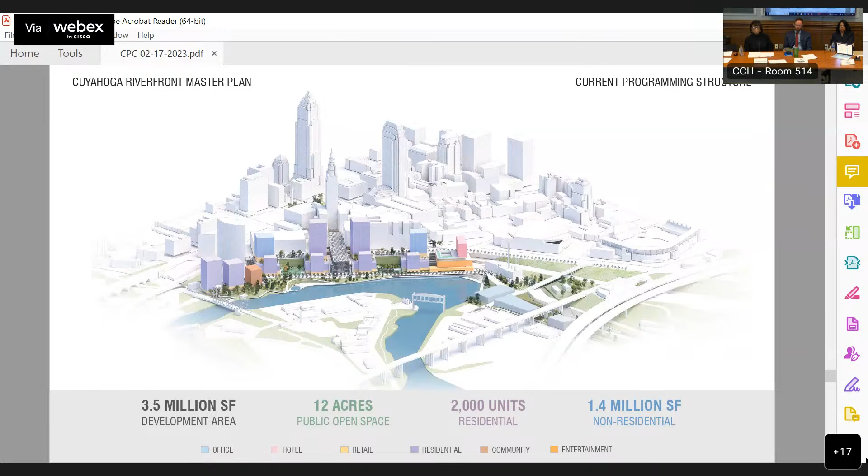So to get to this point, we're going to talk a little bit about infrastructure, but we believe this is a proposal for how we can move forward. Some of this has already been started. We've already been in conversation with the RTA, NOACA, and the city. There's a host of, say, 50 other people working on this that are not in the room today, continually evolving this moving forward. But you can see here, these are some of our next steps, not already in the queue, and that's the traffic impact statement assessment.

It's looking at the multimodal mobility and access, really starting to identify what is occurring right now. We know the Sherwin-Williams building is coming online and that there's traffic there, thinking about that in the future. We also know there are other developments occurring and how those might impact us.

Then reestablishing or rehabilitating the riverfront bulkhead, that's probably first to think about. And the new Eagle Ramp, as I said, to unlock vehicle access in and out of this bowl.

Canal Road, where does it really sit for the idea of civic engagement on the water, and then develop a line behind that. Huron Plaza, which I identified in this slide, you see that as a block a little bit. And then repurposing of Prospect Ave. All of this development is part of that infrastructure to support the big idea.

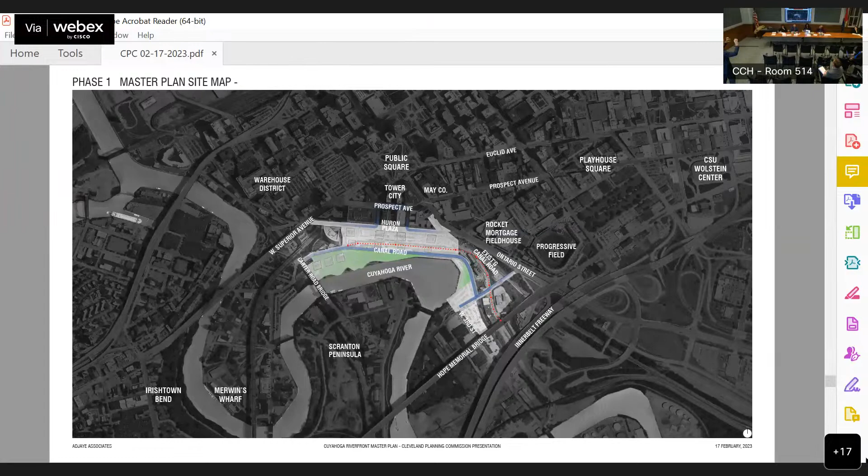Starting at the right for you all, that's Eagle Ramp in blue down, unlocking that potential for Canal Road, realignment of Canal Road, using that space against the water and calling it open space. And then that developable parcel that you're seeing. Go to the next slide.

As part of our design, and I know these are all illustrated diagrams with many layers, you can see that what we're working on is examining that water's edge, really thinking about: are you on a bulkhead, are you pulled off and seeing an estuary, is it natural topography, is it a hard edge? You can see that in some of our concept renderings from the moment, but we're really thinking about that water's edge and how we rehabilitate it.

Then we move to roads. So we've got Canal Road and Eagle Ramp, two big moves I think that start to set up and define working with the topography of how to get in and out of this. I'm sure you all know this, but just to highlight, the Carter Road Bridge is probably our lowest vehicular access out of the site, and then it goes up to Superior, and on Superior there's Hope Bridge. So it's a really complex kind of bowl that we're working with how to get in and out of.

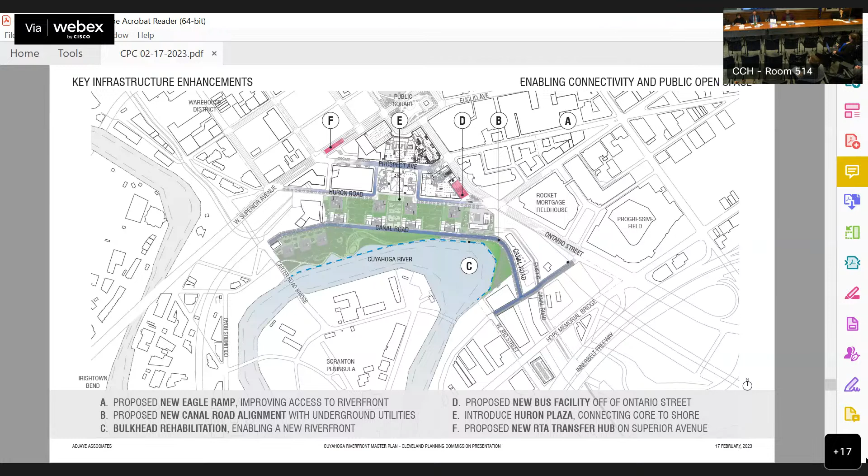And then of course looking at cutting off Huron Road to make that into Huron Plaza. Layering that on with more, whether that's lawns or vegetation and ground cover or planters, that's all part of our development moving forward. We're really starting to think about the scale of those pieces. Next.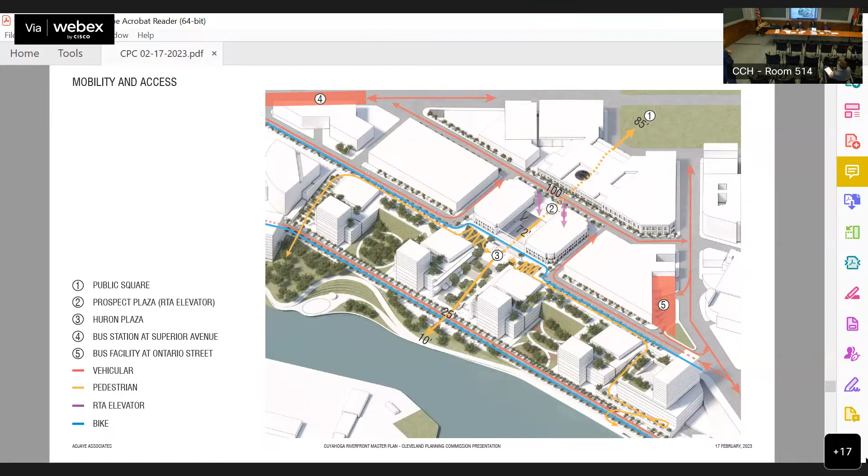All of this to say is that with the master plan, you're going to see a series of buildings. These are representational ideas of change, but the overarching theme we might put on all of these is an idea of low carbon, low impact.

Start with looking at construction techniques and looking at timber, which is having a really strong presence right now, but what other materials are there that have low waste and low footprint issues with the environment?

Looking at ecology, how can we take the water's edge and use that both for education and new development, recreation and transportation?

Looking at how can we use water management oversight? You have 12 acres of open space. What can we do there to help with flow of water?

And then lastly, really understand that we have this prime opportunity to have southern exposed building faces and on the hillside. So how can we use that to help with, say, the winter winds?

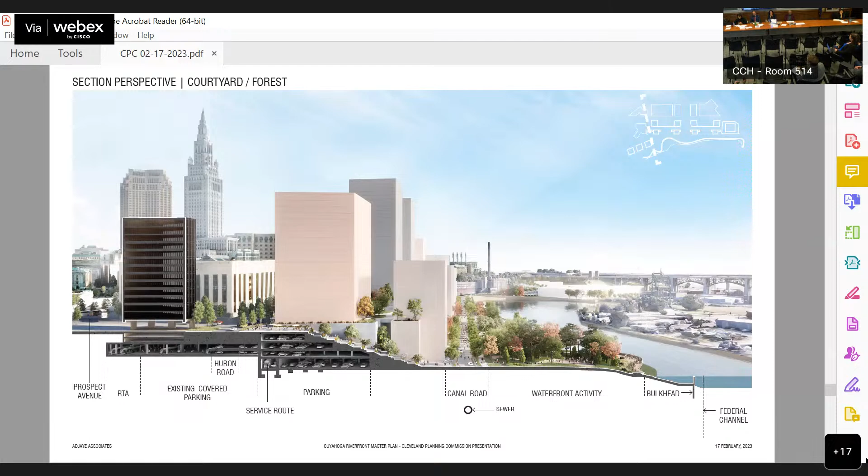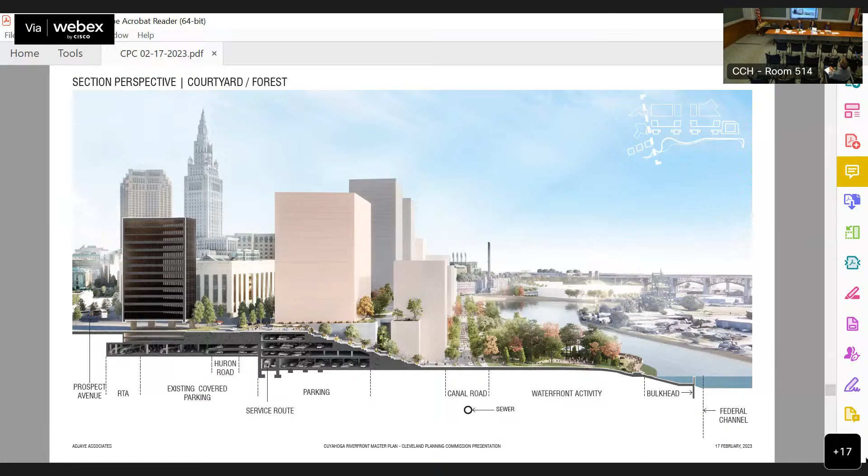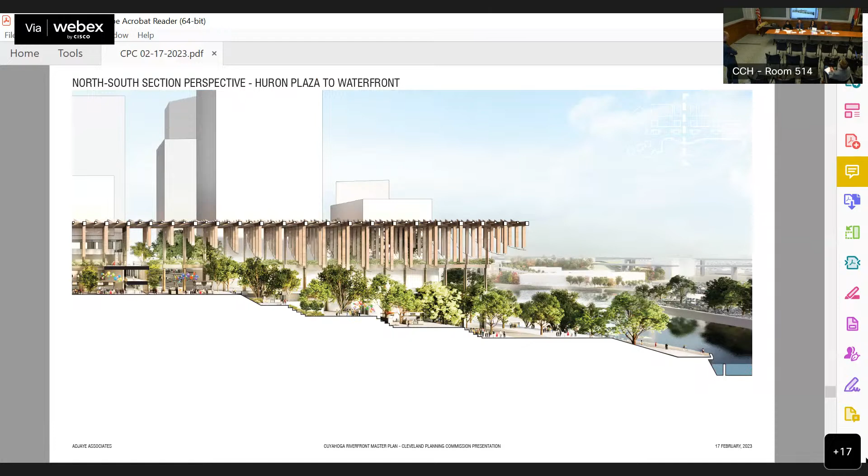Talking a little bit more about that Huron Plaza approach, you can see the two black lines. That is the edge of Tower City. See that? That is the edge.

And what we're really kind of considering here is how can you take Huron Road, work it around in Prospect Avenue, and then using this layer, this base level - this is elevation 72, which is the base level of Tower City - coming up out of the RTA, and then the buses come in on 72.

And really think about how you can move people all along this plane past Huron Road and then access to the water, and so that's where this plaza starts to take place. I'll show you an image in a moment to give you a better understanding, but really trying to use this as a means to make that bridge to the downtown.

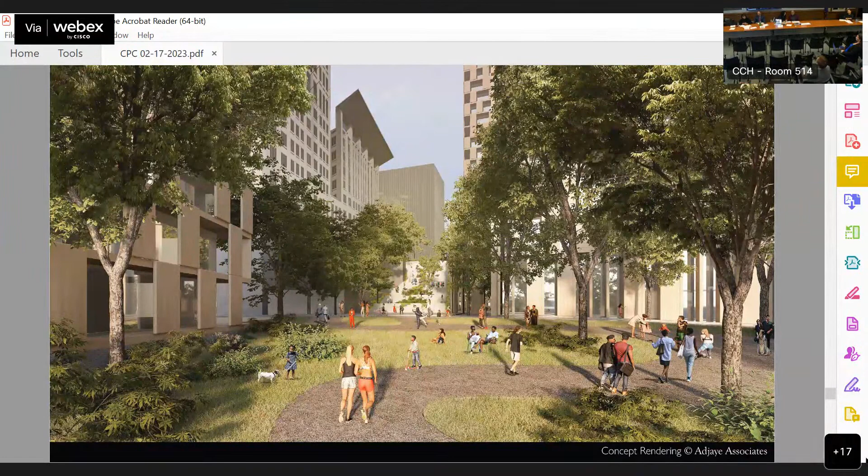So I'm just going to show a few conceptual images for atmosphere, scale, and approach. There's the courthouse, we're looking up back into the city, the courthouse with the overarching angled roof. This is that urban forest exchange, about the idea of having depth there a little bit more than others.

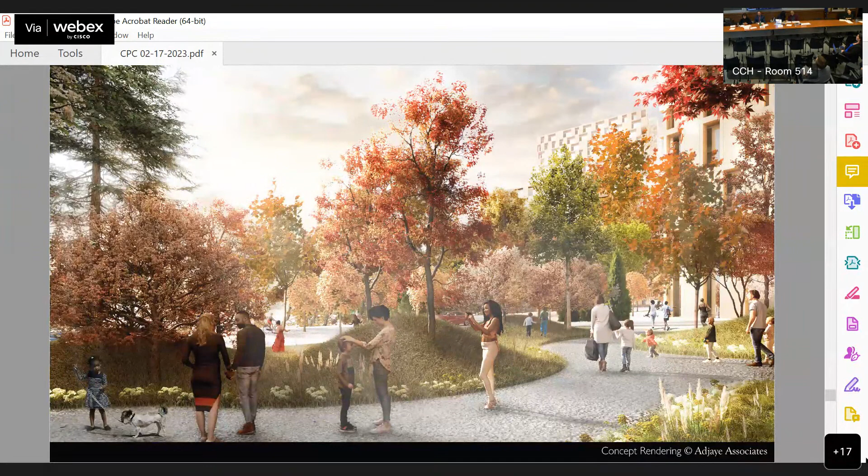This is huge - pocket park. So there's all sorts of levels of scale and space we're trying to identify. These are pocket parks, and these are kind of the residences that will be supporting the infrastructure around here. So you can see the scale of this change, the bulk of this difference.

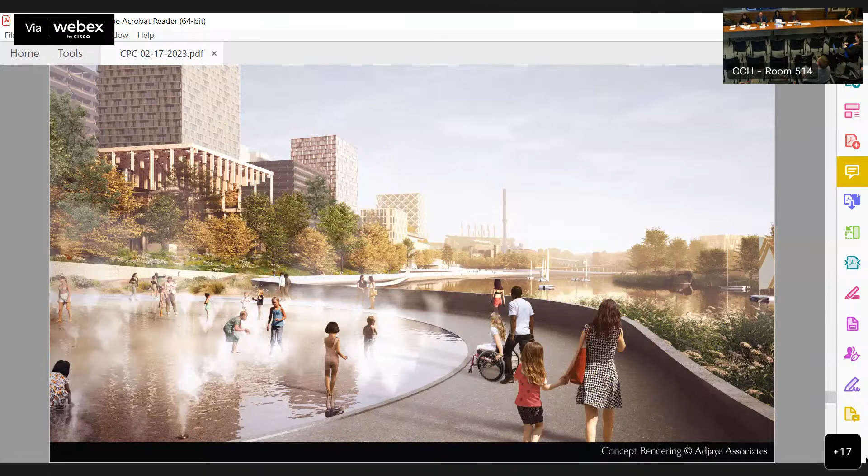That's Canal Road, just in the background from the water. That waterfront activity - right now we included a splash pad. This summer, you can imagine this winter that turning into an ice rink. That's one idea of exploration that we have.

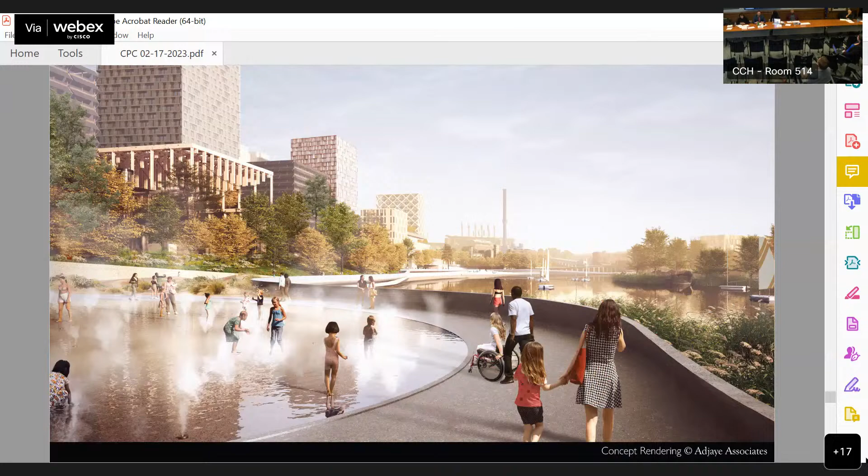You can also start to see that on the right hand side is the water's edge, in which we're going with the natural edge condition, allowing the landscape to fall into the water. Hudson Plaza - this is basically Huron Plaza.

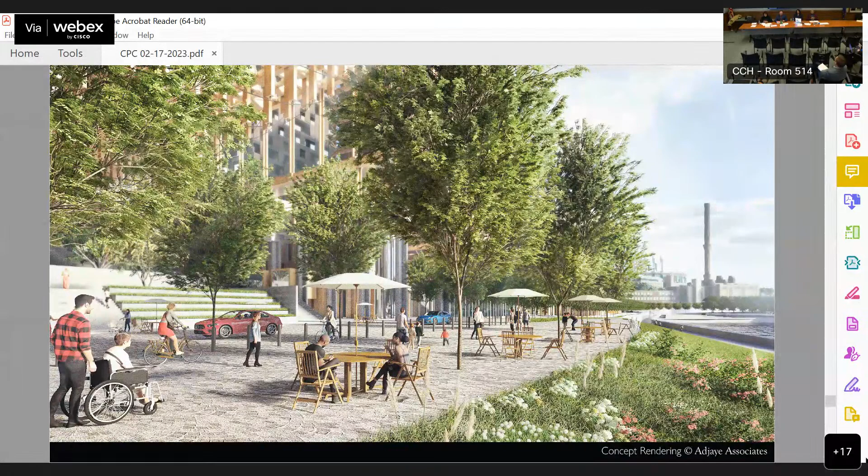So you can see how we're trying to work on that edge condition and really start to think about safety and security, about keeping the road active, starting to think about materials or chicaning or devices that can slow down the car and keep pedestrians safe, trying to privilege pedestrians and bikes on this path.

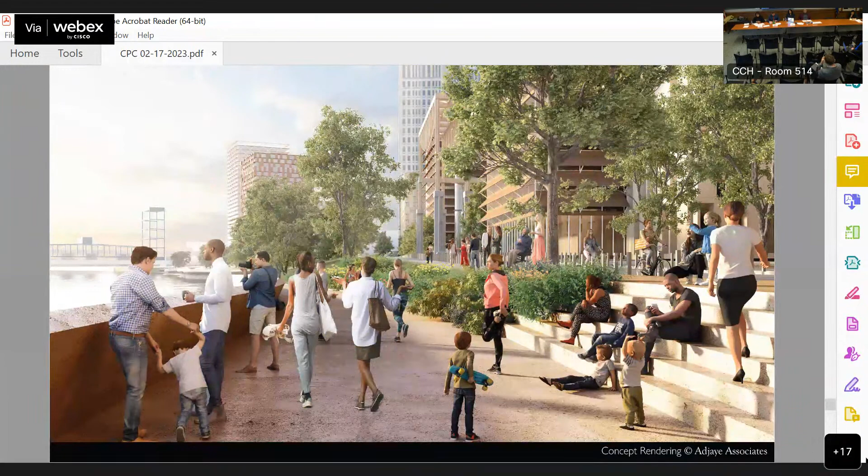Looking, we're at Collision Bend, looking all the way back towards the lake. Terminal Tower slipping in between the buildings, the courthouse, and then just kind of an idea of the massing, so stepping low at the water's edge, more high as we move closer to the city, and then really thinking about those interstitial spaces, breaking down the scale of the urban buildings from what we have today.

Is that a beach? I'm sorry, not as here. It looks like a beach, a river beach. Here we are at Collision Bend.

Basically, in every one of these moments, what we're working on is not really illustrated here. In all of these moments, we're using the building as infrastructure for public space and thinking about comfort stations and accessibility needs. Using each one of these platforms tied to a building that has a section, so we're going to have programming in each of the buildings and have access basically into the exterior and into the interior.

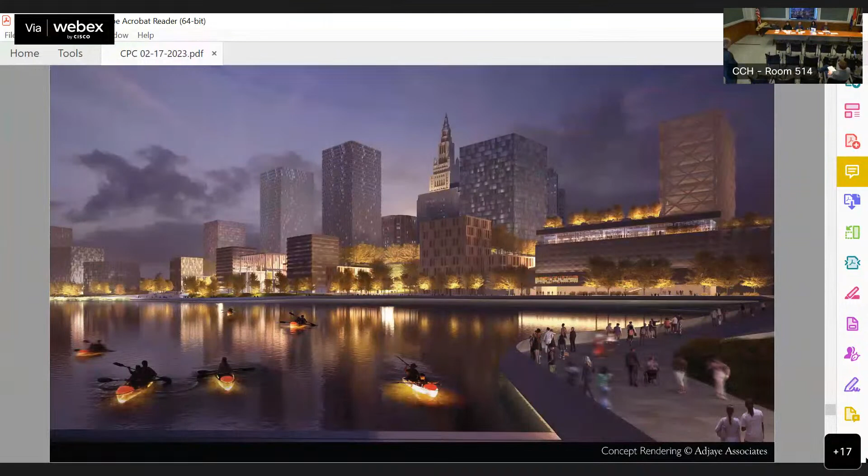Far west again, looking at kayak and inland recreation. Also thinking quite a bit about lighting, knowing that we want to be cognizant of fish and wildlife, so trying to keep light out of the water and avoid light pollution. And then, using light when we can to highlight program spaces and give them identity.

The winter shot, understanding that we're continuing to search for program and ideas for how we can engage more in the winter seasons. It's at the top of our minds. We've had many visits here next winter. We're really starting to think about how we can activate this season. We do have a selection of renters who enjoy nice summer and spring days, but we're considering and trying to get into more about what kind of activities we can do outdoors to draw people to have an amenity outside of their home that reinforces that.

And then I just want to take this moment to again note that the buildings we're seeing are ideas of massing. They're a place to help support this idea of infrastructure, not only city infrastructure like sewers and transportation, but also pieces of infrastructure to help support accessibility and dealing with topography. And what we're really hoping for is, as this project moves forward, that the buildings take on their own identity, and it's not a homogeneous kind of stance like this.

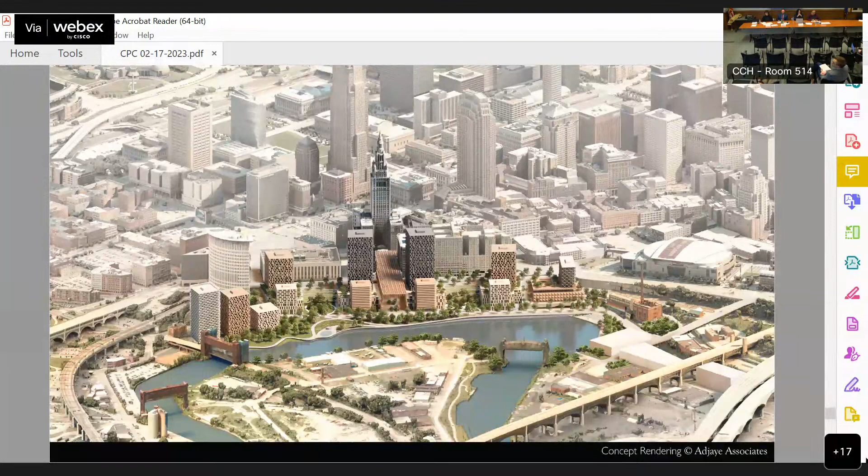We appreciate it, it is a huge undertaking. As we move forward with this project, as the director mentioned, likely the largest I've ever worked on in 35 years here in this community. But I think it positions us for the next 135 years as a community as we work together. It cannot happen without public-private partnership and the receptivity, embracement, and willingness of the administration, council, and councilman being here. We are truly rowing in the same direction. We've got a lot of work to do.

So I said we'll be back often, but you're pressed for time and you wanted to get in comments, feedback, questions - anything you can do in the next few minutes to engage with the commission is welcomed. Thank you.

Councilman Slife has some questions. Yeah, I have a couple. I hope they're questions, but if they're comments, I'll raise my voice at the end and make it sound like a question. So one - we're in budget here, it's been a rough week.

We talk a lot about how, especially with the river, trying to balance recreation and industry, and a lot of that conversation can be broadened into getting us access to the river, not necessarily in it, but also industrial traffic. I want to point out there are plans - Councilman McCormack knows more about this than me - but efforts further north up the river, near the mouth of the river, where there's a lot of industrial activity and trucks currently cutting through public housing to get out of the flats. Their logical route to the highway right now is to come over the Detroit Superior Bridge and then go 80 miles an hour down Huron, which is not ideal, but I think it underscores the need for us to take seriously a new connector for those trucks to continue west past the Garrett Morgan water plant to the Shoreway. So that if this were to happen, but that were to not happen, we would end up pulling industrial concrete trucks either through Ohio City or down Prospect, and neither is an ideal scenario because we should really be separating those vehicles from pedestrians. I put that out there to say I see that as being linked to this, and I want us to advocate for them in tandem.